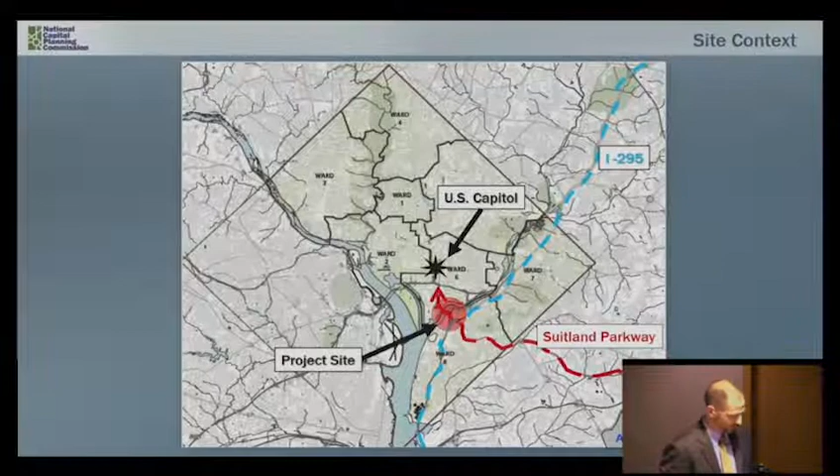As I mentioned, the project does include two major components, the Frederick Douglass Bridge, shown here, as well as the improvements to the South Capitol Street corridor. The bridge, just as a reminder, includes a triple arched form, including 6 travel lanes, dedicated bike paths, as well as pedestrian paths, and 4 overlooks.

The bridge has been subject to numerous consultations with many agencies, and we'll note that if any changes to the design are proposed, they will need to be submitted to the Commission again for review.

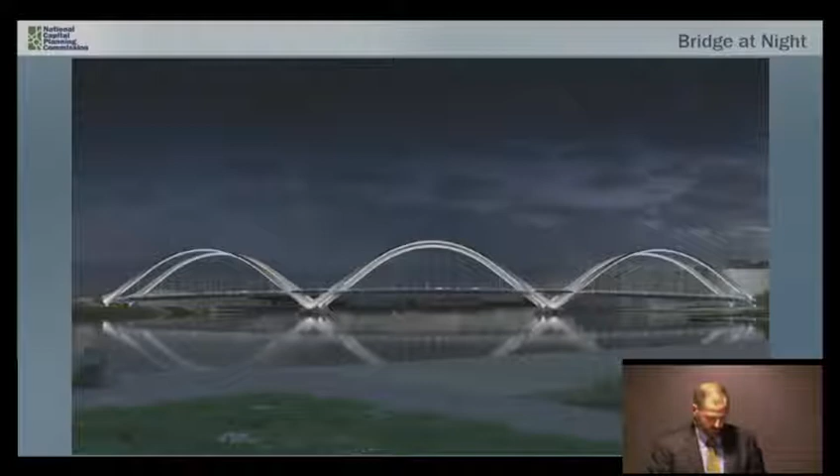We also noted in April that the project does include architectural lighting, but the specifics have not yet been determined. The bridge is south of the Capitol, as I mentioned, and there may be impacts to nighttime views depending on the type and intensity of the lighting. The current submission does not include additional details regarding lighting, though DDOT has acknowledged the importance of this issue both in this instance as well as other bridges across the district.

NCPC staff have been working to develop a study of bridge lighting for both rivers, thinking about a variety of issues, including city identity, the monumental core, natural systems, and historic resources. This analysis will be provided to DDOT to help inform some of the lighting discussions.

In this particular case, for the Frederick Douglass Bridge, staff believes that white lighting is appropriate for illuminating the bridge at night, but again, the intensity and brightness should respect the lighting hierarchy of the U.S. Capitol and other important monuments and memorials.

Further, the issue of temporary colored lighting is one that will need input from other federal agencies, including the Commission of Fine Arts and the National Park Service, because of their oversight in certain areas of Washington, D.C. and the Anacostia River, and additional coordination with other district agencies. Staff therefore requests that if temporary colored lighting is considered in this case, DDOT continue to work with NCPC and other relevant parties.

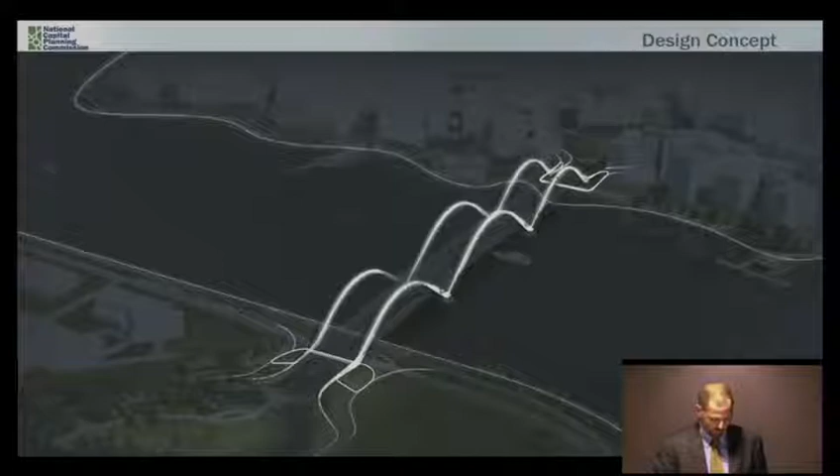So for the remainder of the presentation, I'm going to focus on the site improvements and particularly how the design has changed since your last review. I'll focus on your previous comments as well as some other aspects of the design that may need consideration.

The Commission in April did require DDOT to provide additional information regarding pedestrian and bicycle access. In particular, there were questions about the width and operation of the proposed pedestrian and bicycle paths. Here you can see an overall framework of the connectivity to and through the site.

For comparison, the proposed trails on the Frederick Douglass Bridge will be 18 feet. This will include two 5-foot bicycle lanes and one 8-foot pedestrian zone, and again, this is on both sides of the bridge.

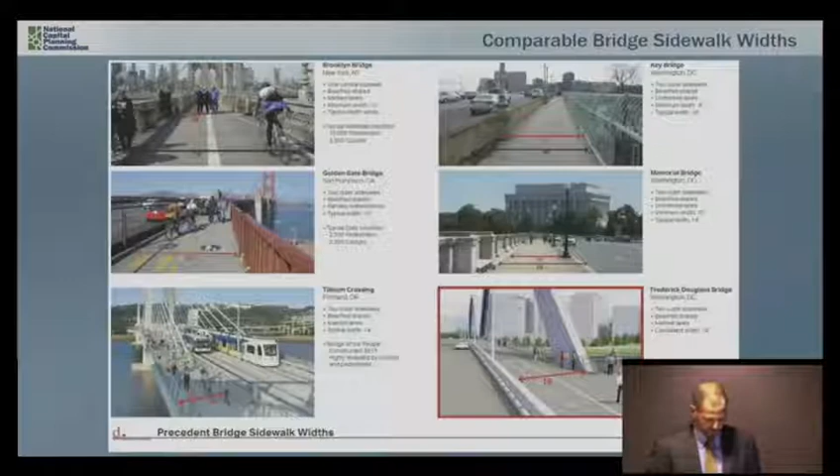In all these examples, pedestrians and bicyclists did share the same path. However, in most cases, the path is marked on the ground to denote these two pedestrian and bicycle zones. Staff did inquire whether some barrier could be used to provide separation between pedestrians and bicyclists. However, this separation would require at least a foot for the structure and then at least one foot on either side to avoid conflicts between bicycles and pedestrians.

DDOT has indicated that after the bridge is completed, there is an opportunity to look at how they function and whether operational changes are necessary. This may include making the bicycle trails one-directional on either side of the bridge. As such, staff suggests that DDOT evaluate whether changes to pedestrian and bicycle operations are necessary after the bridge has been completed and in use.

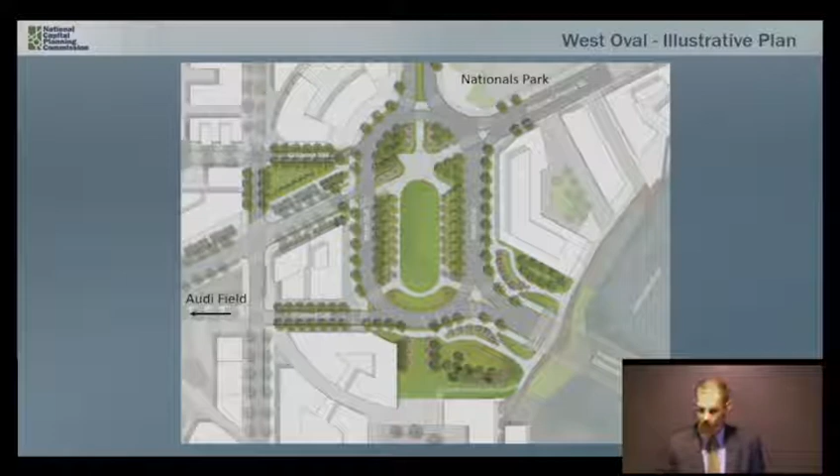Next, I'm going to talk about the West Oval, shown here on the screen. Today, this is a growing entertainment area. It's also a neighborhood anchored by Nationals Park, as well as the new DC United Stadium, or Audi Field, which is in nearby Buzzard Point.

Given the surrounding context, the West Oval is proposed to have active programming in a variety of ways, and this proposal is consistent with the concept review you saw in April. The design continues to emphasize that axial relationship with the U.S. Capitol, which is to the north.

In addition to that important north view, the northeast to southwest axis of Potomac Avenue is also an important alignment found within the L'Enfant plan, and you can see that here on the screen, cutting diagonally across the site. Because this corridor connects the two stadiums, it will likely serve as an important pedestrian connection.

In April, staff did note that this axis through the oval was not fully successful because it did not align with the cartway on either side of the oval. It also did not resolve pedestrian flows. As such, the Commission requested the applicant explore alternative design concepts to address this alignment, as well as the views of Potomac Avenue, where it crosses the oval to the north.

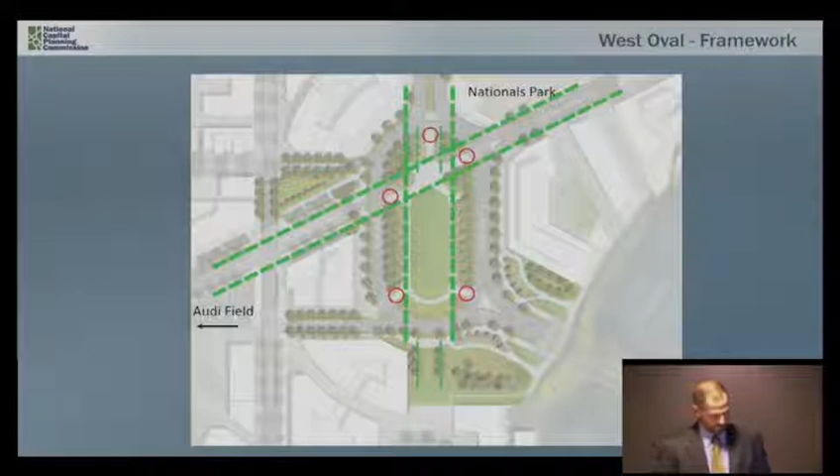In response to the Commission's comments, the applicant has revised the design to better resolve this crossing and the intersection with the West Oval. For example, the view shed has been defined through the introduction of new trees to help frame that view, and a star-shaped plaza has been created that reconciles the pedestrian flows from various points.

The resulting design creates a space that can be programmed for a variety of events while still accommodating pedestrian movement, and it also preserves that view to the U.S. Capitol.

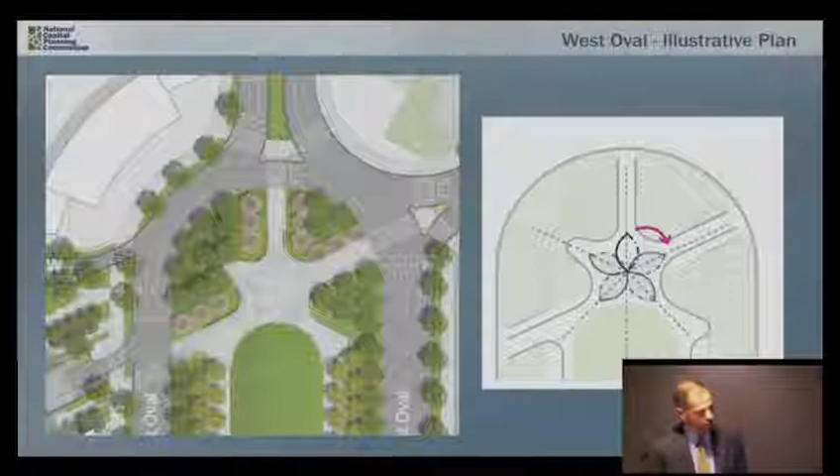Here's an enlarged view of that area, including the proposed plaza, and also how it would connect to the surrounding sidewalks and paths. And on the right, you can see a diagram that shows how the plaza form was generated.

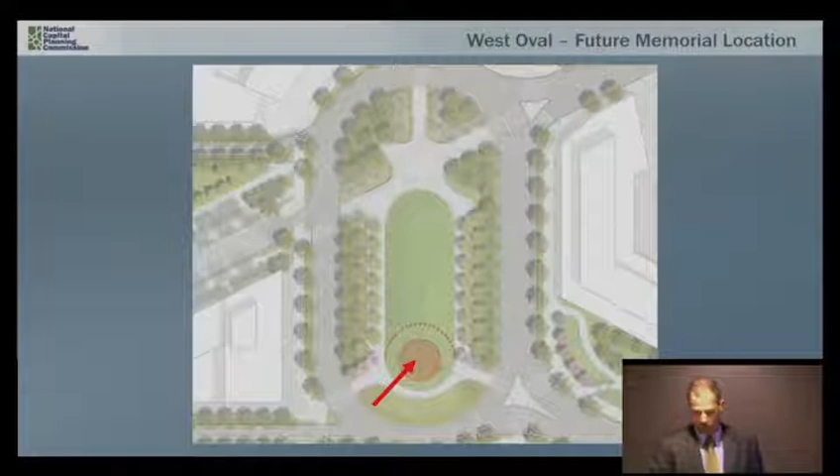This location takes advantage of the axial view of the U.S. Capitol, as well as the alignment of the new bridge, which enters there from the southeast. The topography in this location is also raised slightly to provide a focal point. In general, staff finds this proposed location appropriate, and I'll mention that the design at the bottom of the oval was actually modified to accommodate this.

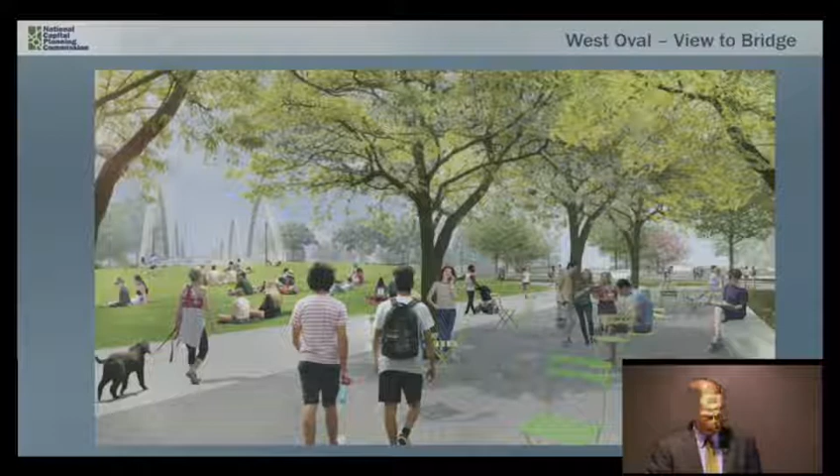As such, staff recommends the applicant consider adding additional trees and plantings at the southern end of the oval to terminate South Capitol Street, better frame the public space, improve the setting for any future memorial or public art, and also help reinforce this visual connection between the bridge and the west oval.

So next I'm going to talk about the east oval. This area is designed as a more passive space with pathways, natural plantings, and the esplanade that will help connect this area to the riverfront and Poplar Point further north.

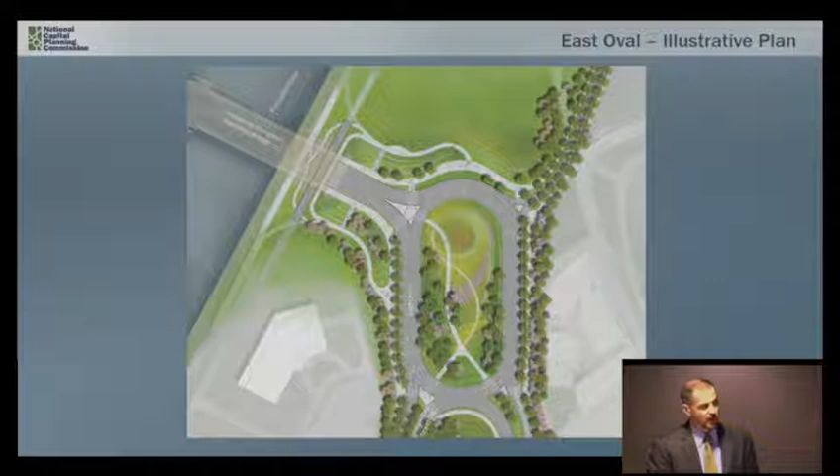The East Oval is generally surrounded by open space, including the Anacostia Riverfront and low-density development as it borders Poplar Point, again Anacostia Park, which is owned by the National Park Service, and Joint Base Anacostia Bolling, which is to the southwest. Portions of Poplar Point and nearby Howard Road could redevelop in the future, although the setting will likely remain more open as compared to the higher density development occurring on the West Oval.

In addition, I'll note the East Oval is only one small component of the larger improvements proposed in this area. As you can see here, the landscaping and reconfiguration of Suitland Parkway, which extends south from the oval towards historic Anacostia, is significant, and the project scope is much larger here than on the west side.

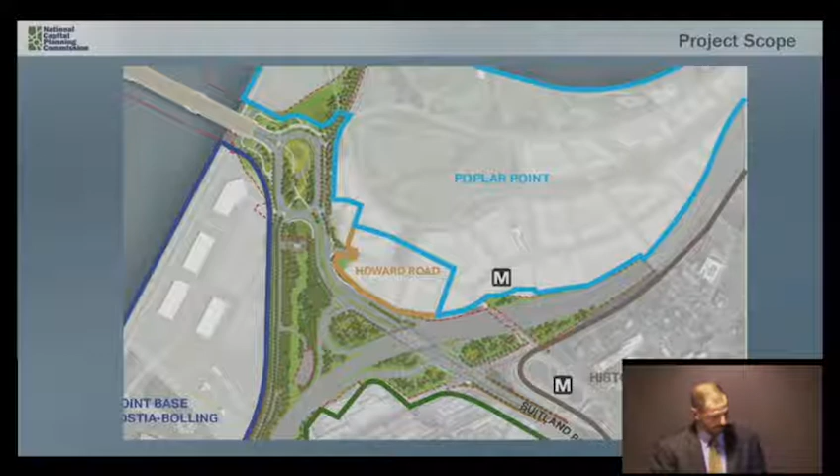Because of the setting, the East Oval could provide an opportunity to develop a larger scale local memorial or public art. In this location, it would not compete directly with the views of the U.S. Capitol, and it could also provide a gateway to Anacostia.

Therefore, staff suggests the Commission find that the East Oval is an opportunity for a gateway element, a future memorial or public art, and further, this oval has the most potential for a large-scale element to distinguish it from other nearby open spaces. In addition, this site could also provide interpretive opportunities related to Anacostia River, Poplar Point, and the historic Anacostia neighborhood.

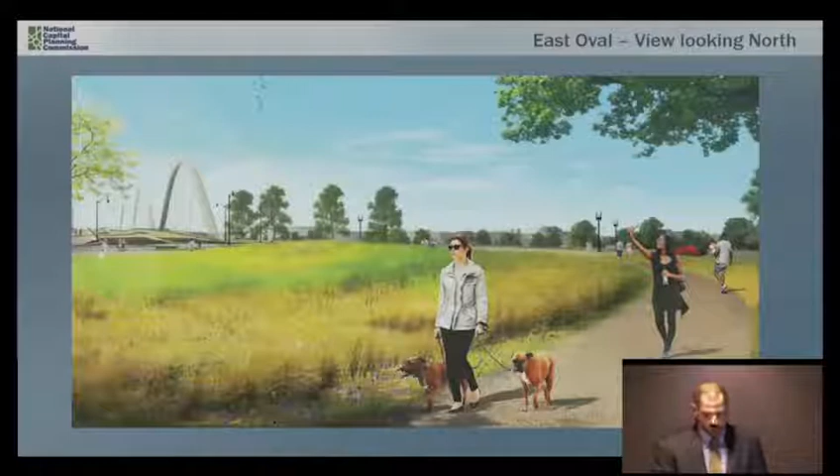Staff also recommends the applicant consider other opportunities for interpretation and programming which could serve as an amenity to the surrounding community.

Staff believes the visitor experience could be enhanced by increasing the number of trees and other landscaping. Such plantings could reduce the visibility of traffic and dampen noise from cars, while staying consistent with the natural landscape proposed. Landscape elements would need to avoid utility areas. Changes in topography could also be incorporated with similar effects. Staff suggests incorporating additional trees and plantings where possible to buffer pedestrians from noise and traffic views, particularly at the south end of the oval.

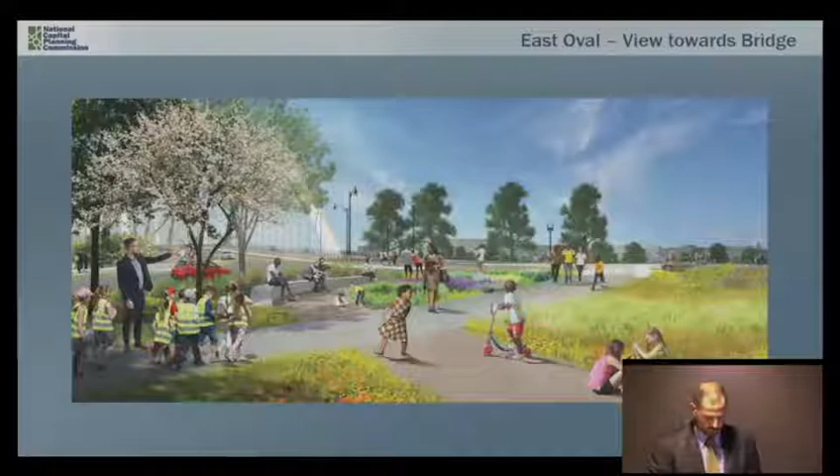At concept review, the Commission also requested additional information regarding stormwater management. The applicant has provided that information, and they will comply with the District Department of Energy and Environment regulations. Runoff will be captured and filtered in several locations throughout the project. We have bioswales and other measures situated in certain locations which will accommodate that runoff.

Finally, other information regarding signage, lighting, and other elements have yet to be fully developed. As such, staff recommends the Commission request that DDOT provide the following information for future review. This would include a lighting plan for the ovals and the esplanades, as well as the bridge, a signage plan that describes how that will be accommodated, and also details regarding the cultural legacy of Frederick Douglass and how they might be incorporated into the project, consistent with the visual design goals described in the final EIS.

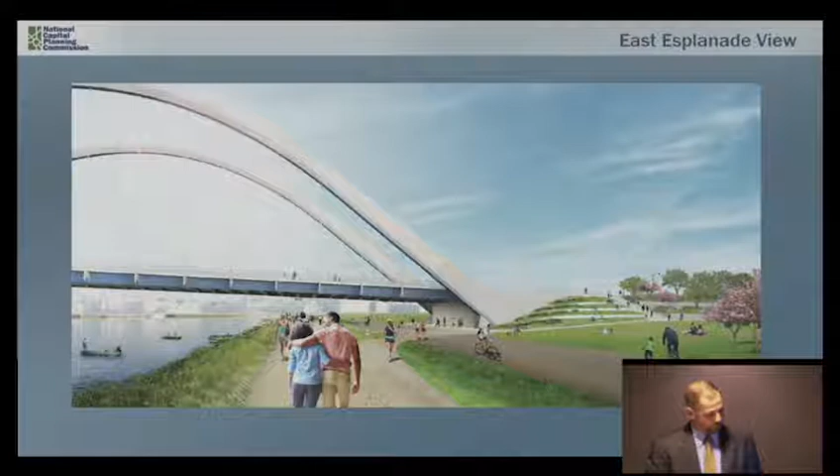It is therefore the Executive Director's recommendation that the Commission approve the preliminary plans for the South Capitol Street corridor landscape and site improvement, notes that staff is developing an analysis of bridge lighting, and in this case finds that white lighting is appropriate, but the intensity and brightness should respect the lighting hierarchy of the U.S. Capitol and other monuments. Requests that if temporary colored lighting is considered, DDOT work with the appropriate stakeholders on an operational agreement, and also recommends DDOT evaluate pedestrian and bicycle operations after the bridge has been completed.

Regarding the East Oval, notes that the siting here is different compared to the West Oval, and finds that the site could be an opportunity for a large-scale memorial or art element, and also additional interpretive and programming opportunities related to the river, Poplar Point, and historic Anacostia.

Staff also recommends additional trees and plantings to help buffer traffic views and noise, and requests DDOT consider other pedestrian connections at the northeast side of this oval to improve connectivity. Finally, requests DDOT provide information regarding lighting, signage, and also details regarding the cultural legacy of Frederick Douglass and how they might be incorporated into the project.

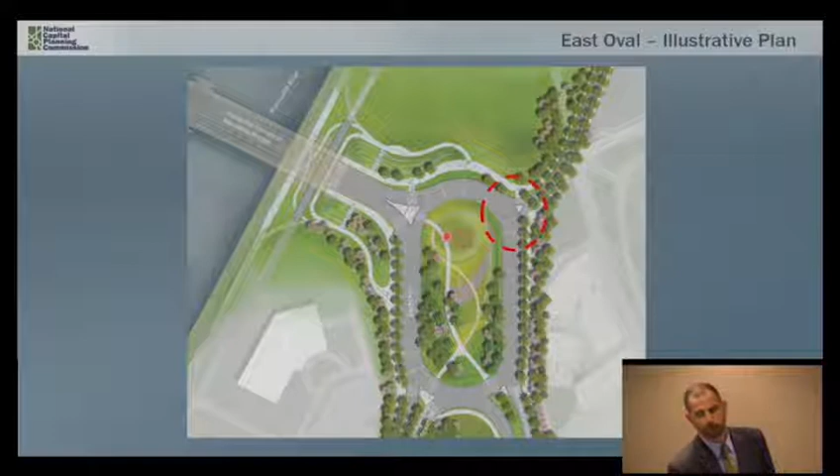And you're going to have gatherings in this space, and that looks like a pretty small island to me. I imagine that'll get worked out as you have events to do traffic control, but I'd like to hear more as this is developed about what kind of traffic counts they're expecting with pedestrians and bikes. If I missed that in here, I apologize.

But I'm not sure if we addressed that question specifically, but it's clearly a good question. One of the major changes here is the design speed of the oval is 20 miles per hour, and the speed limit posting is 15 miles per hour. So this is a completely different experience for drivers and pedestrians compared to how it is today after you go over the bridge, with the choice between South Capitol Street or Suitland, where there's an opportunity to pick up speed as long as traffic isn't backed up at rush hour. But this will be a completely different experience after the project's complete, with 15 miles per hour. I think of it more like a Lincoln Park, minus probably the speed humps.

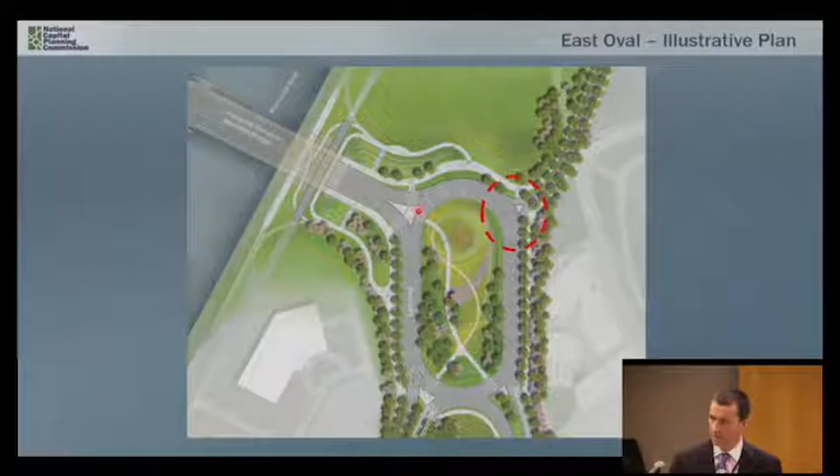Also, each crosswalk is signalized, so there'll be an opportunity to push to get a pedestrian-controlled right-of-way at lower speeds. I think also a lot of the emphasis, as we discussed earlier on the east side, is not just about the oval, it's also the riverfront access. Did I answer your question?

You answered it, I'll be curious to see how this works. Okay, and I think taking a harder look at perhaps some traffic calming besides the speed—I wouldn't, because the tendency will be that people will want to go faster. And I wouldn't rule that out for the future.

A lot of times, and I appreciate the comments about the bicycle and pedestrian multi-use path on the bridge, we'll see how that will work. But we're proceeding informed by best practices and design guidelines. It's no secret we have many intersections, much less complicated than this, that aren't performing and need further traffic calming.

But I think, as we see, it would probably be, on days when this is programmed, as I think we would all aspire it to—thinking about a World Cup celebration or a festival in the summer—there's probably temporary parking around it, and it's very busy. It's looking more like a Lincoln Park kind of space, with a wedding in the middle of the oval. So there'll be different personalities at different times of day. Yeah, okay, thank you. Yes.

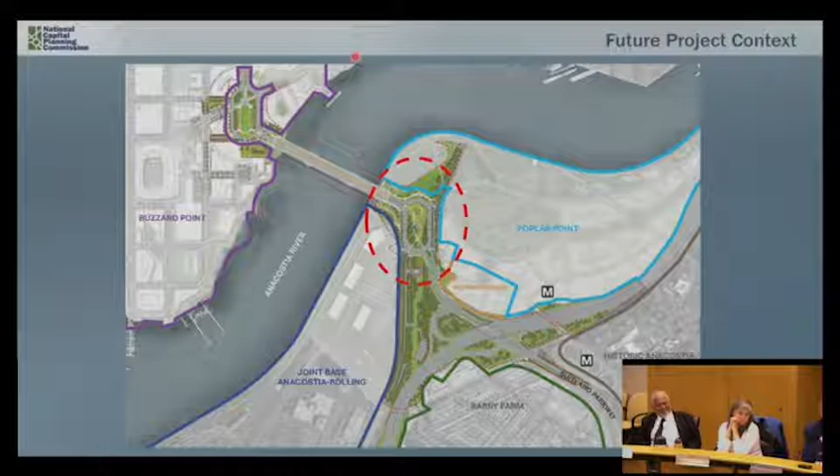Yes, Commissioner Shaw. Well, I thank you for your comments, Ms. Wright. And I think we've talked about this before about the context of place, right?

We just put the green over the ovals and don't look at the fact - I was at Buzzard Point for the ribbon cutting, and it's amazing how it's changed, with the really intense streetscape plan and open space plan for Buzzard, the openings for Nationals Park. So sort of seeing this within the context of these two green things doesn't give the appropriate context of how it's fitting into a larger planning system. And that's on both sides as well.

We've had a strong intention for the green space - I remember we were doing Shepherd Parkway and fighting over the brick sizes and all that. It's meant to look and feel a different way, like the little lanterns, and we've planned it that way, right? So I think both of these are responding to the respective places in which we've put those two sides. I like that it has the two personalities there, but once again, this may be just about how we show the larger context of what's going on here in the future.

And then for DDOT, once again we've been a very happy partner with you as Office of Planning on all the things that have come here in terms of design. So I think for any of the comments that come to DDOT, I'm taking those also as the Office of Planning for making sure that we can, either in our engagement, programming, and other things, get the appropriate larger planning context for this.

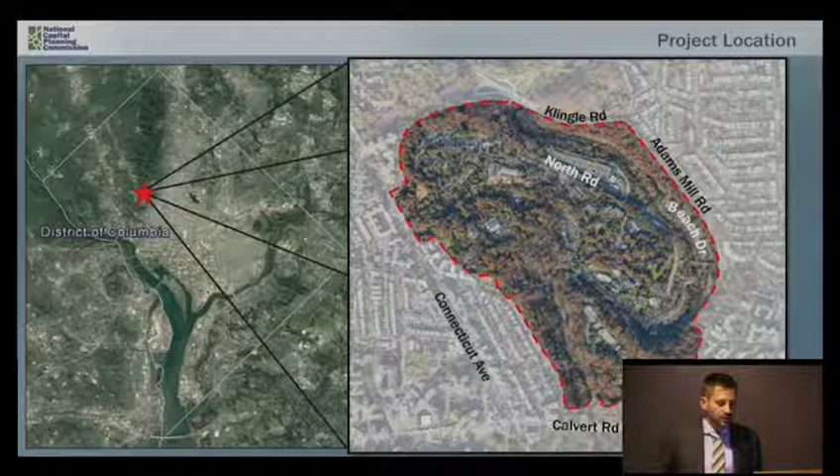Good afternoon, Mr. Chairman and members of the Commission. The Smithsonian Institution has submitted site development plans for supplemental perimeter fencing at the National Zoological Park in Washington, D.C. The project was reviewed as a concept design last month and is now before the Commission for preliminary and final approval. The National Zoo is located off Connecticut Avenue in northwest Washington, D.C., in a largely residential area of the city. It's generally bounded by Klingle Road to the north, Adams Mill Road to the east, and Calvert Road to the south. The zoo also sits within Rock Creek Park, which is managed as a unit of the National Park Service.

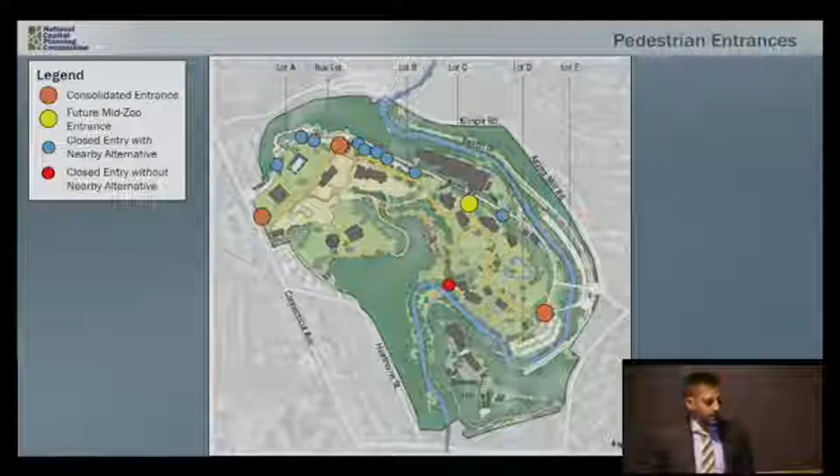The large majority of pedestrian entry points are a short walk from the consolidated entrances, which is where most pedestrian traffic currently enters the zoo.

This map shows where existing entry points would be closed, as well as their closest entrances. The blue circles are entry points with nearby access to the consolidated entrances, and the red circle would have no alternative access nearby. The only area where pedestrian access would be closed without a nearby alternative is the location near Research Hill in Amazonia, which is in an area of the zoo property largely identified for staff use only.

The Smithsonian has indicated that several studies have identified open access to the zoo as a safety concern, and that there have been a series of high-profile security incidents and threats to the safety of visitors, staff, and animals.

To meet security needs, the zoo is proposing a visitor access and security fencing project, which it is planning to implement in multiple phases. The first phase, which is the subject of this review, will secure the perimeter through the installation of fencing and serve to formalize the 3 visitor access points. It's important to note that public access through the entrances would still be open at the completion of this phase.

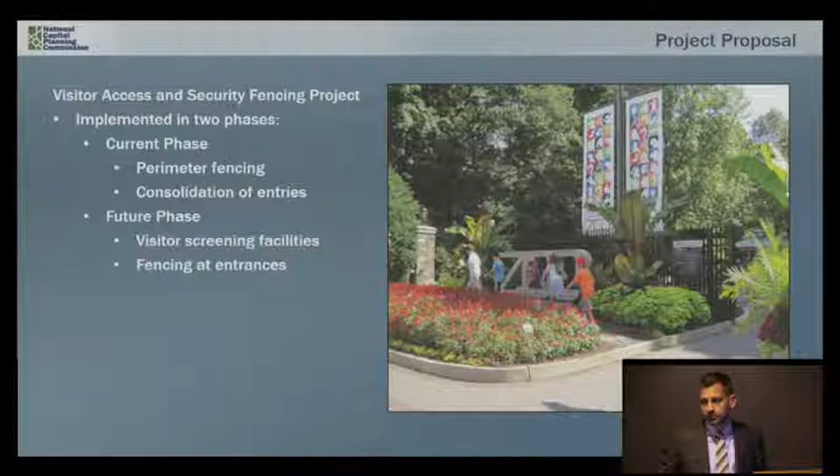Before I review the new fencing, I first want to review the layers of existing fencing that have been installed in various locations to meet several different objectives.

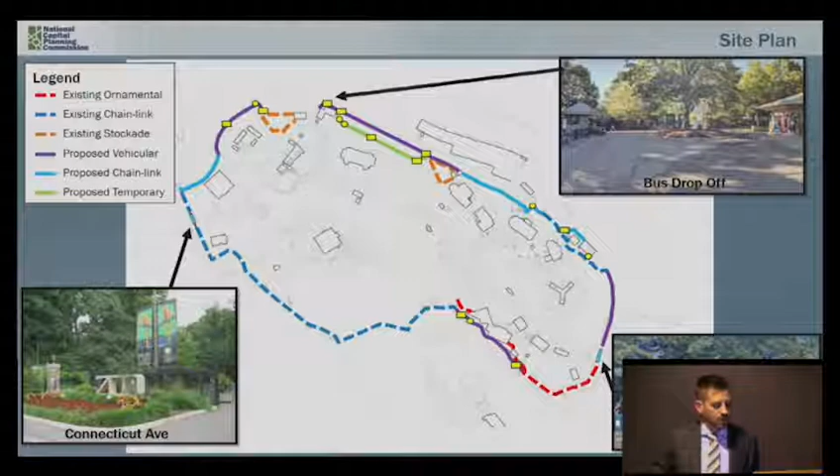As part of this project, the applicant has indicated that it plans to install several pedestrian and vehicular gates in the new fencing that would allow for operational and maintenance access at key locations along the perimeter. They're marked here in yellow. The circles represent pedestrian entries and the squares are vehicular entries.

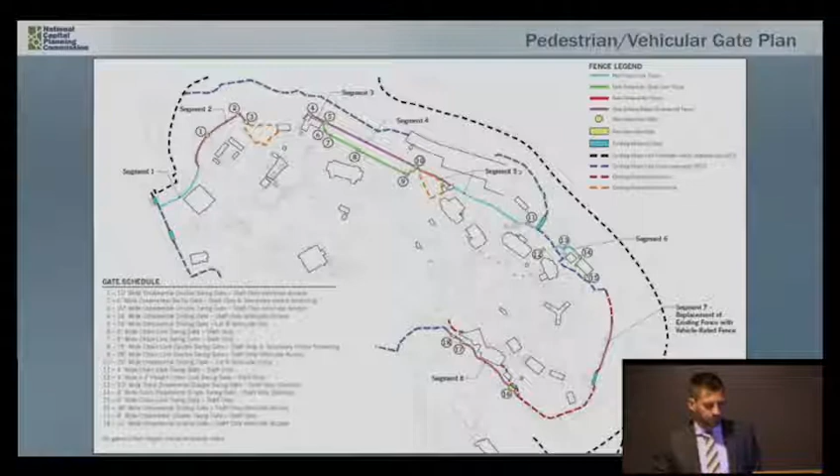I'll next review all of the areas of proposed fencing by segment, along with submitted renderings that demonstrate visibility of the fence from key viewpoints, which are marked on each map as a gray circle.

In the previous submission, ornamental fencing was planned for this location, but in its review of the project, the Commission of Fine Arts expressed concerns over the visibility of ornamental fencing. CFA recommended chain link fencing in this location, noting it would be less visible in areas of dense vegetation. Staff has analyzed this change, concurs that chain link fencing would be less visually prominent here, and further notes that it's consistent with adjacent segments of existing chain link fencing.

Continuing around the zoo, the second segment would run from the visitor center to the bus drop-off. This segment would use a new fence type, an 8-foot tall vehicular rated ornamental fence, which would be used in visible locations along the roadway to prevent ramming. It would be similar in style to the existing ornamental fencing used at the zoo, with the exception of larger post sizes and horizontal reinforcing channels and cables to meet crash rating standards.

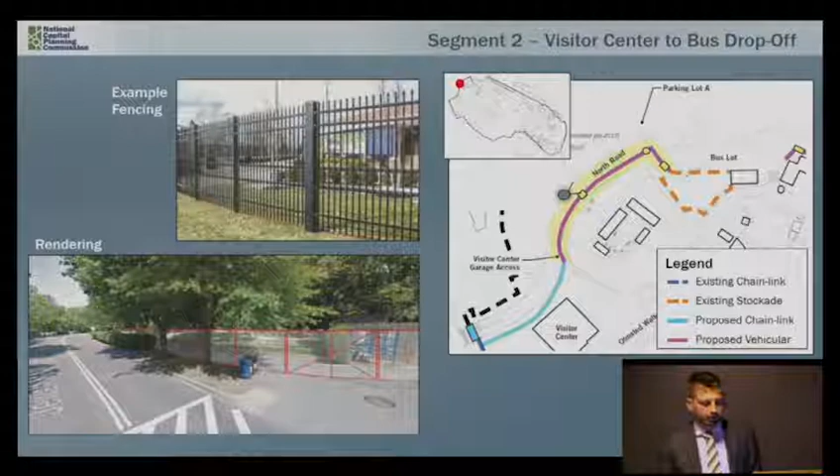It would connect to the east to a tall wooden stockade fence, shown with a dashed orange line, which is used to shield a maintenance area from public view. As can be seen in the rendering, this segment of fencing would separate an internal walking path from North Road and the outer zoo perimeter.

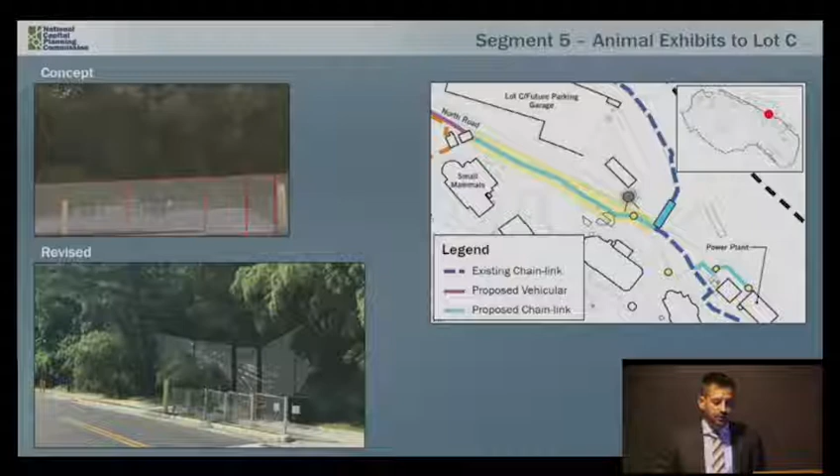Near the zoo's power plant, a modified chain link fence would be built upon existing flood control walls. The fencing in this location would serve to secure and isolate the power plant from the main zoo. The initial proposal at this location was the use of modified ornamental fencing, but again, in response to comments from CFA, the applicant has revised the submission. Staff has analyzed this change and supports the use of chain link fencing.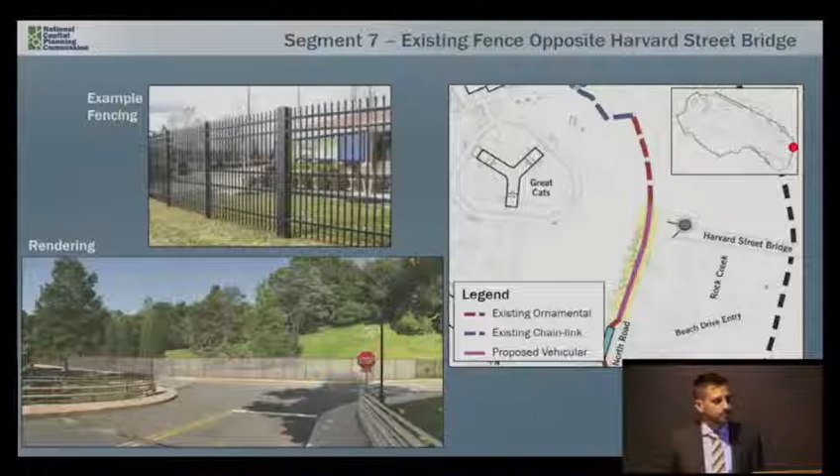Continuing past the existing fencing at the lower zoo entrance to the other side of the zoo, vehicular-rated fencing would be used to secure the pedestrian walkway along the zoo's Amazonia exhibit. Please note that while the rendering shows existing security gates at this location, the project would include the removal and replacement of these gates for consistency in style and to avoid redundant security measures.

This segment of fencing would connect to existing ornamental fencing to the east and existing chain link fencing in the vegetation over to the west.

In conclusion, it's the Executive Director's recommendation that the Commission approves preliminary and final site development plans for supplemental perimeter fencing at the National Zoo. The purpose of the project is to replace some areas of existing fencing, add segments of fencing to eliminate gaps, and consolidate pedestrian access points.

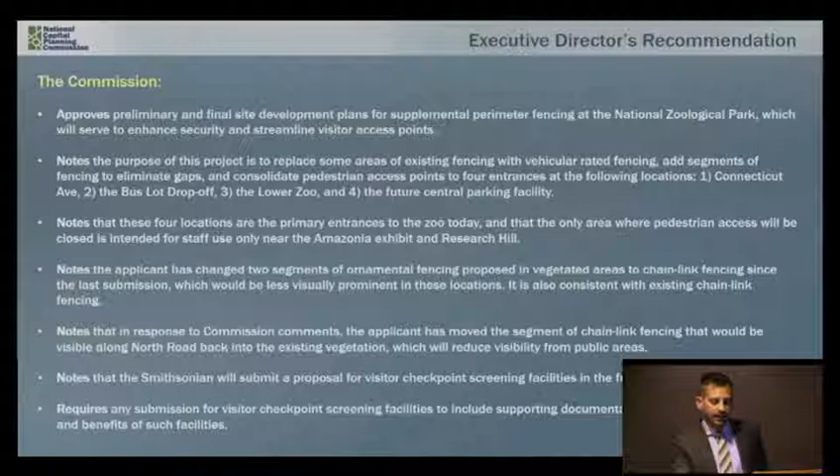These future consolidated entrances are the primary entrances to the zoo today, and the only area where pedestrian access will be closed is intended for staff use only near the Amazonia exhibit and Research Hill.

The applicant has changed two segments of ornamental fencing proposed in vegetated areas to chain link fencing, which would be less visually prominent in these locations. The applicant has also moved the segment of chain link fencing along North Road back into the existing vegetation, which will reduce visibility. The Smithsonian will submit a proposal for visitor screening facilities in the future, and any such submission must include supporting documentation explaining the need for and benefits of such facilities.

Before I conclude the presentation, I'd like to note that staff has received many public comments in opposition to this project, which are attached to the EDRs in front of you. As noted earlier, most of the concerns were related to the construction of visitor screening facilities at the consolidated entrances, which will be considered under Phase 2 of the project. We anticipate that these outstanding concerns can be addressed during this future review process.

That concludes my presentation. I'm available to answer questions, as are our representatives from the Smithsonian, the zoo, and the consultant team. Thank you, Mr. Gerbich.

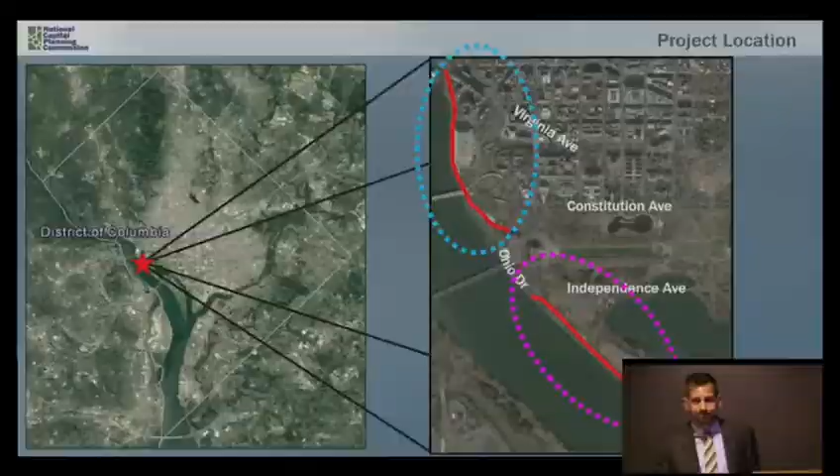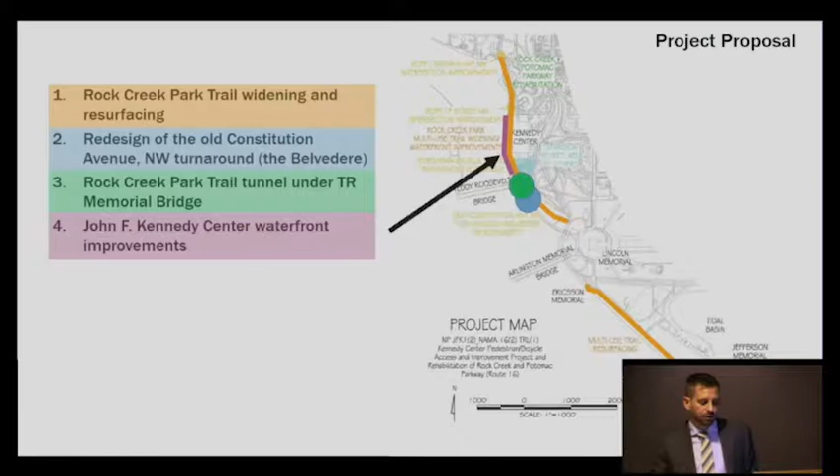The construction of a tunnel for the Rock Creek Park Trail under the Theodore Roosevelt Memorial Bridge, marked with a green circle, and trail improvements along the Potomac waterfront near the John F. Kennedy Center, marked in purple. I'll next describe each of these components in more detail, including staff analysis and key recommendations.

The first major component is widening many trail areas and resurfacing the highlighted segments. Trail widths currently range from 8 to 10 feet, many out of compliance with established standards recommending a minimum width of 10 feet. The northern segment from Virginia Avenue to Ohio Drive will generally be widened to 14 feet, with 10 feet in areas constrained by important trees or landscape features. The southern segment will remain at 9 feet. The entire highlighted trail will be resurfaced with consistent porous asphalt pavement.

Staff believes that the use of porous asphalt along the length of the trail will provide a much smoother, more consistent experience for cyclists, and that the additional width in many areas will allow for improved navigation and reduce the risk of cyclist-pedestrian conflict. Further, the use of porous pavement will help meet stormwater regulations and serve to reduce runoff into the adjacent Potomac River.

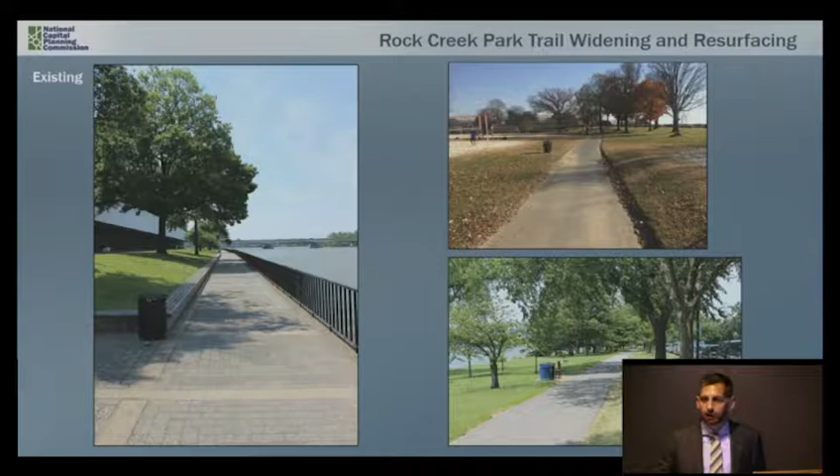The second major component includes the redesign of the Belvedere. The Belvedere was the original turnaround for Constitution Avenue at its western terminus, but since the construction of Rock Creek and Potomac Parkway, it has not served a traffic function. Because of its prominent location at the end of the National Mall, adjacent to the Potomac River, the site was identified as a prime candidate site for a future memorial in the NCPC Memorials and Museums Master Plan, and as you recall, was recently considered as a potential location for the National Desert Storm and Desert Shield Memorial.

The site, however, is primarily auto-oriented with a paved drive aisle that allows for vehicular access. The applicant is proposing a redesign that will accommodate enhanced landscaping, realign the trail, and provide a site layout in preparation for a future memorial.

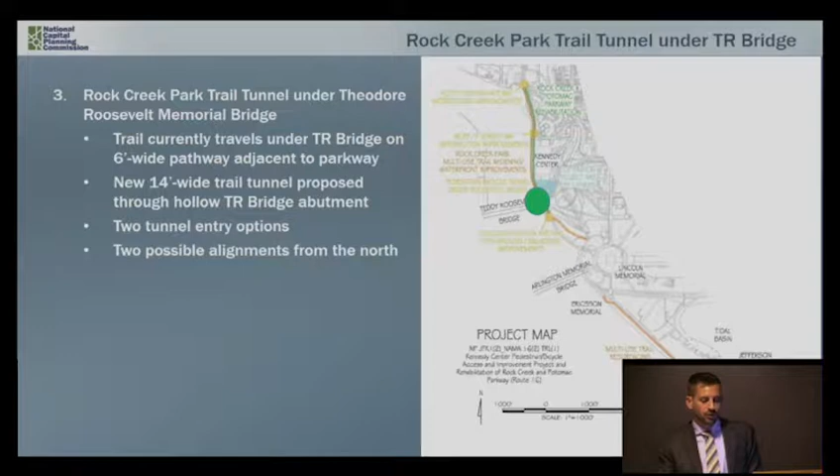This slide shows the existing 6-foot wide trail route that is shared with vehicular traffic on Rock Creek and Potomac Parkway. Note that in addition to the narrow width, there are no hand railings or other interventions here to improve safety.

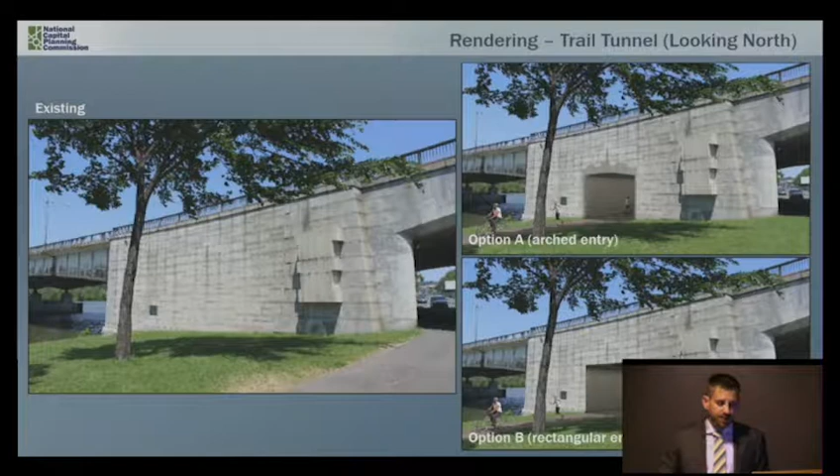In general, staff supports efforts to create a dedicated tunnel in this location, which would allow for a wider trail and greatly improve safety for trail users. Further, staff finds that the arch option is more architecturally interesting and would be consistent with the arched entry of the existing vehicular tunnel and the arch spans that cross the Potomac River.

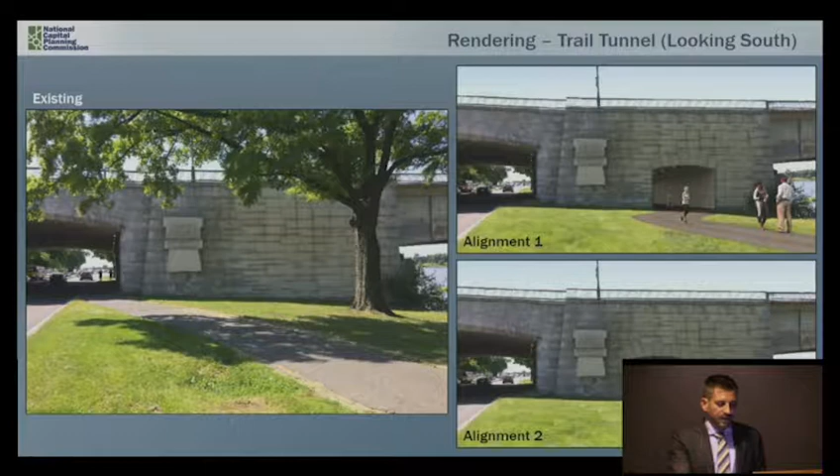While the abutment is hollow, the applicant has noted that the centered tunnel in alignment 1 would impact a counterfort and would require structural reinforcement of the bridge. Alignment 2 would avoid this counterfort and require fewer engineering interventions. Further, the plans indicate that the trail in alignment 1 would need to be curved to achieve the appropriate angle moving into the tunnel, as can be seen here.

Staff believes that this would reduce visibility to and through the tunnel and could pose a safety concern, while alignment 2 would be more direct and allow for greater visibility. In summary, for this component of the project, staff supports the slightly off-center alignment 2 with the arched tunnel entryway because it would avoid impacts to major structural elements of the bridge and allow for clear lines of sight through the tunnel for pedestrians and bicycles, while the arched entry would complement the existing bridge design.

The last major improvement is on the segment of trail next to the John F. Kennedy Center waterfront, shown here with a purple line, which includes the widening of the trail and removal and replacement of existing trees and benches. The trail is currently 10 feet wide, but seating areas and benches constrain the functional width to 6 feet. The trail would be resurfaced with porous asphalt pavement and widened to 14 feet, which would require the removal of several trees, many of which are in fair to poor health.

It's important to note, while discussing this segment of trail, that this is the location of the pedestrian bridge across the Parkway that was approved by the Commission as part of the Kennedy Center expansion project. The improvements here and at the Belvedere will not affect access to or from the Kennedy Center via the future bridge.

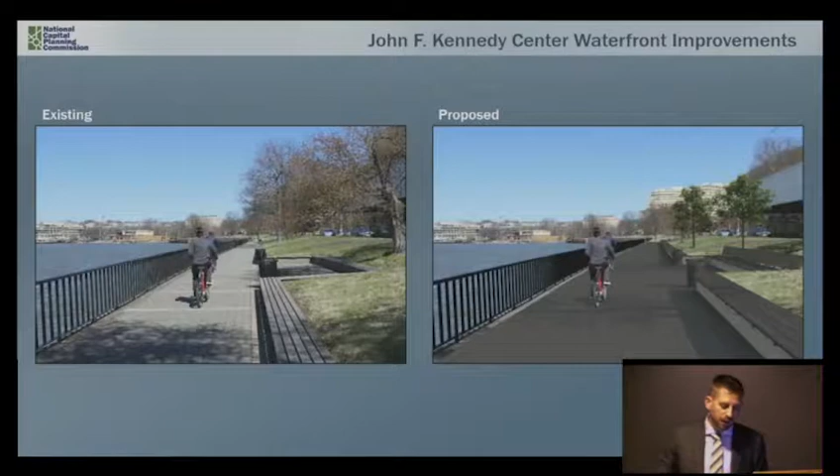While the submission notes that many trees would be replaced, staff would like more information to better understand the extent of mitigation and compliance with the tree replacement policies in the comprehensive plan. Accordingly, staff requests that the applicant provide a narrative that describes the tree replacement strategy for the project, as well as how it will prevent a net loss of tree canopy in accordance with the policies related to tree canopy and vegetation in the comprehensive plan.

In addition to the more significant project elements, there are a couple other minor improvements of interest to the Commission. The first is the removal of a segment of sidewalk along the north side of Virginia Avenue adjacent to the Parkway, which is shown in orange on the image on the right. There are no crosswalks on this side of the street that connect to any adjacent sidewalks or trail segments, nor does the sidewalk continue along the Parkway. The placement of the sidewalk is confusing for pedestrians, encourages inappropriate street crossings, and presents safety concerns. Staff believes that its removal will help improve navigation for pedestrians and cyclists at this intersection.

Lastly, the submission notes that signage will be provided throughout the project area, which will further improve wayfinding and navigation. Staff supports the need for additional signage, but to ensure sufficient information to analyze the scope and scale of its placement, staff requests additional information regarding the extent and location of any proposed wayfinding signage.

In conclusion, it's the Executive Director's recommendation that the Commission comments favorably on the proposal to improve Rock Creek Trail, finds that site improvements and landscaping proposed at the Belvedere will help formalize this location as the site for a potential future memorial, supports trail alignment 2 with the arched tunnel entryway because it would avoid impacts to major structural elements of the bridge, allow for clear lines of sight, and complement the existing bridge design, notes that several trees will need to be removed to widen and realign the trail segment near the Kennedy Center.

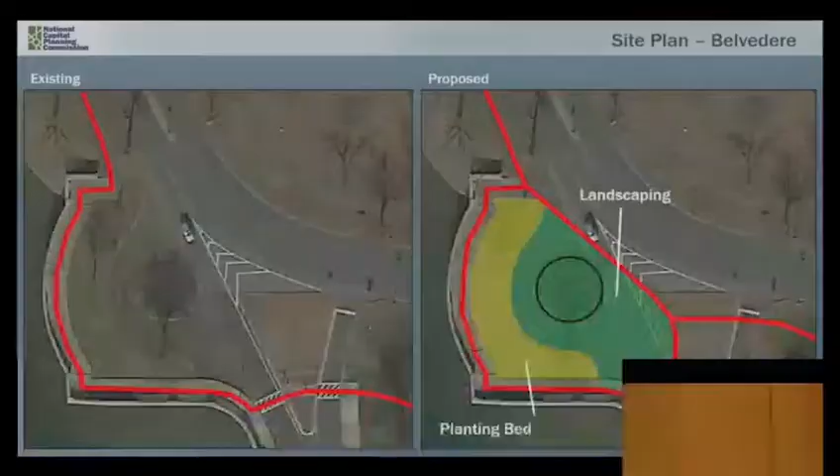Basically the area you can see, the kind of expanded green area over on the right side, that would move out to the right, and that side lane there would move back onto the main roadway, and the turn would occur kind of where that existing leg is over on the right side. So it'd be reorienting that so you have a more traditional intersection that occurs in that location.

Okay, and is that two-way traffic at this point, or one-way? Two-way. Right now you kind of have it coming in from one side and out the other. It's going to be going in and out in the same area in the proposal. It'll be two-way, but of course you can only go one way at certain hours of the day when the Parkway reverses. Understood. Some people actually follow that.

This is an important part of it. We're capturing a little bit more green space instead of asphalt, but it's very important to regularize that intersection a little bit, because right now people come off that Parkway and shoot right up to the Memorial Bridge, and it's just a speedway there, so this will slow things down.

One other quick question on the timing. Since this is a concept design at this stage, when do we think we'll be seeing preliminary? You have a sense of that? That is probably a question for Park Service. The compliance path is pretty easy. This is a categorical exclusion, and we have more compliance work to do, but I'd ask Tom Shiflett, Federal Highways, if you can tell us more about when we think we'll be submitting for preliminary.

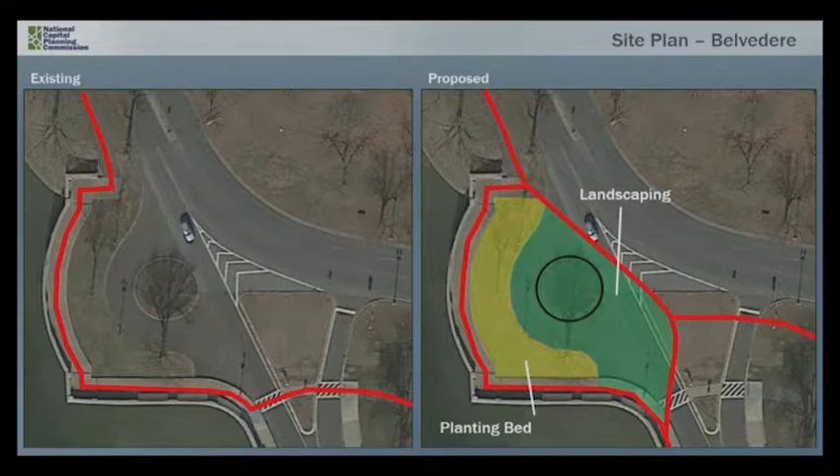I think it's within a few months. You need to come to the microphone, please, and announce your name and your role in the project.

My name is Tom Shiflett. I work for Federal Highway, Eastern Federal Lands. I'm the project manager for this project. The next submittal will be about the end of August, beginning of September, I don't remember the exact day. That will advance these concepts a little bit more, probably to the preliminary stage. Some of the other work, which is mostly rehabilitative in nature, will be actually to a 70% design. So you're talking about the design development phase. Yes, what that boils down to is that we'll be back in the September, October timeframe for preliminary and final, something like that. Yes. Okay, thanks.

Thank you. Any other comments or discussion? Hearing none, I'd entertain a motion to approve. All in favor, say aye. Aye. Opposed? Unanimously approved. Thank you. Fantastic, thank you.

Next is agenda item 5D, for approval of preliminary site and building plans for the new master clock facility and the rehabilitation of several historic buildings at the U.S. Naval Observatory, submitted by the Department of Navy. I'm looking at our clock on the wall, and I'm hoping that we're right on time with the master clock.

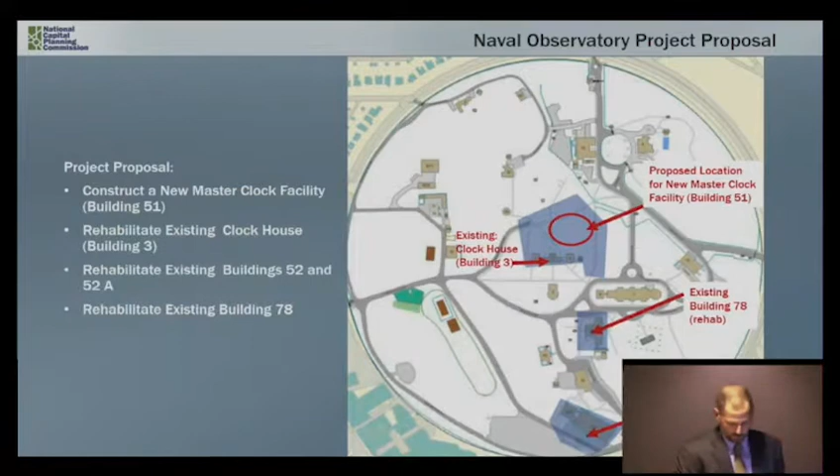The Naval Observatory performs an essential scientific role for the United States, including the Navy and the Department of Defense. Its mission includes determining the positions and motions of the Earth and other celestial objects, maintaining precise time, determining the Earth's orientation in space, and maintaining the master clock for the Department of Defense.

The campus has been determined eligible as a historic district for the National Register of Historic Places, including the buildings, structures, and landscape elements contributing to its significance. This period of significance begins in 1881 and ends in 1954. Architect Richard Morris Hunt designed many of the buildings and landscape features for the campus beginning in the 1880s, and these buildings are the only known examples of his work in Washington, D.C. These include the clock house, which I mentioned, as well as the administrative building.

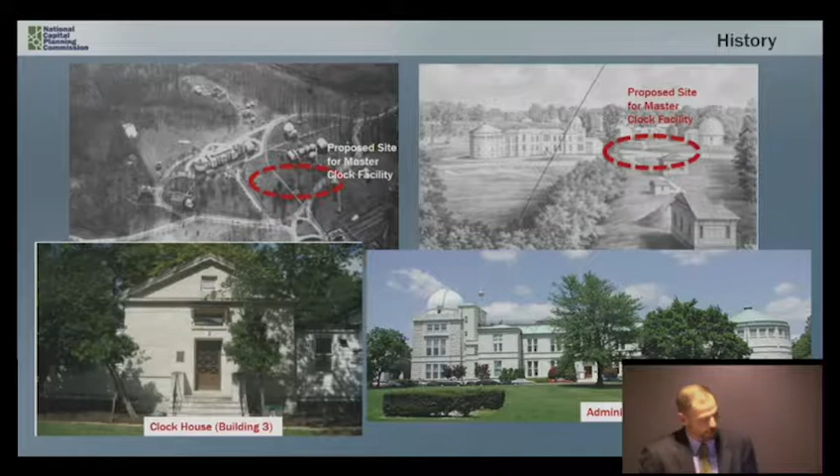As part of their process, the Navy compiled a historic landscape survey in 2017. This identified significant historic landscape elements, which informed the decision for locating this new master clock facility. This diagram shows some of the analysis they undertook as part of that.

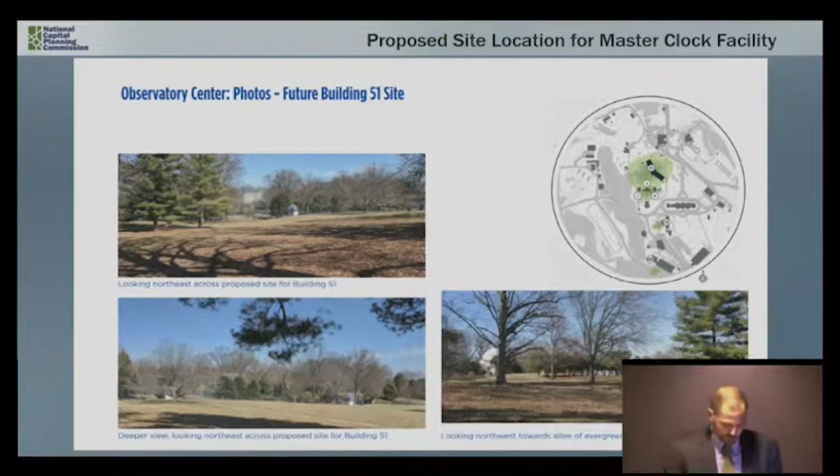Moving on, I'm going to talk now about the proposed siting of the facility, including its location and design. While consolidating many functions into one building, the design of the new master clock facility must address many requirements and constraints while meeting the mission needs and project needs, integrating into the existing site and landscape, and being compatible with the existing buildings and the spatial organization of the campus.

For mission reasons, the master clock facility needs to be located as close as possible to the clock house while addressing some of the constraints on the site, including security, avoiding geothermal fields, archaeological sites, and also avoiding sites that interfere with some of the existing telescope buildings. These are all constraints on where this building can be located.

Prior to the submission before you, the Navy looked at some other options and met with the agencies early in the design process to consider a different location, directly north of the historic clock house, shown here. This was problematic in several aspects because it would visually compete with the historic buildings, including the clock house, and the axial relationship established by the historic building would also impact the landscape elements.

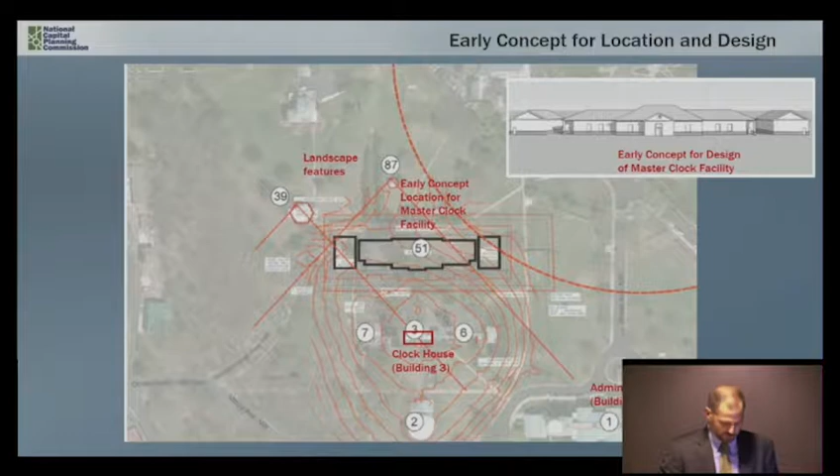This location was dismissed, and the Navy identified a new location, which is here before you today. With this particular scheme, the Navy and the agencies found that the concepts for the exterior design, shown in the top right, were problematic because they started to replicate the more traditional architecture and stylistic designs found on the campus. As you'll see, the Navy has submitted a different design approach in response to some of these comments.

Here's a blown-up plan of the proposed facility. This location is slightly northeast of the historic clock house because it best addresses the site constraints I mentioned. Vehicular access to the facility would be provided by extending an existing avenue around the site, and this extension will eliminate an existing dead end. Pedestrian access to the clock house will be from the existing network of sidewalks on the site, and there will also be a new sidewalk planned along this road with ADA access to the new building.

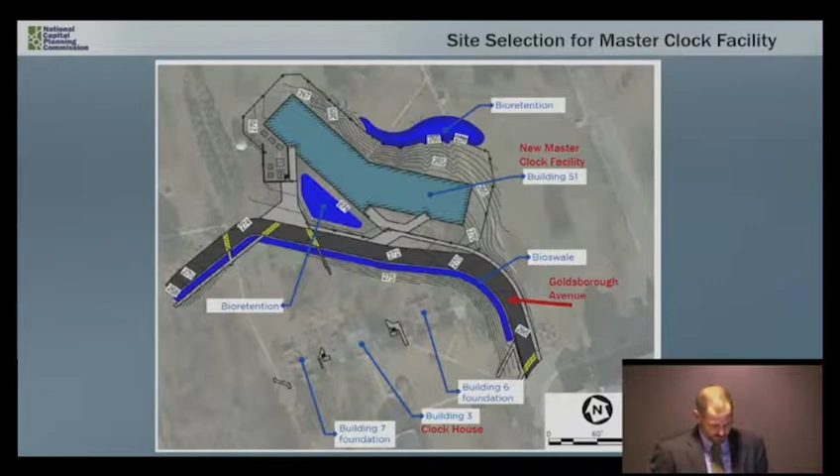The new facility will also comply with stormwater retention and erosion regulations. It will include rain gardens at the front and rear of the building, highlighted here in blue. Therefore, staff recommends the Commission support the Department of Navy's proposed location for the new master clock facility, as well as the site location, noting that it is lower in grade than the historic clock building.

So now looking at the proposed design for the master clock facility, there's a rendering here. The function of the facility requires the building to be linear in plan, 1 story in height, and approximately 15,000 square feet. It is served by redundant equipment rooms located at each end. And for security reasons, a single entrance is the primary ingress and egress with some additional emergency exits.

The building's operational program requires there be no windows, and therefore the only other openings are those related to mechanical systems. Following some of the latest agency discussions, the design has evolved to reflect a more minimalist contemporary design, which really quiets the building, allowing it to be in the background and also not to compete with some of the existing historic buildings. As you can see here, the design is rectangular in form with 2 wings that intersect near the main entrance.

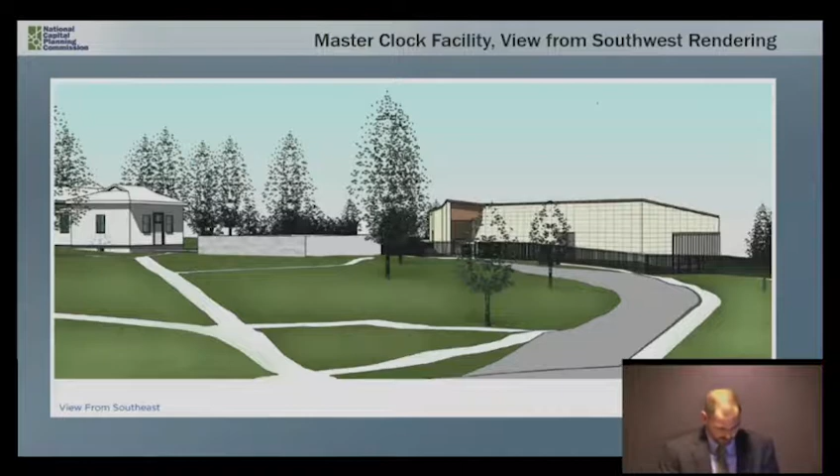The facade of the building facing the old clock house has 3 openings: the main entrance, as I mentioned, plus the emergency exits. The function of the master clock facility requires some special security features, including a perimeter fence. An additional sliding gate for egress and access will also be provided.

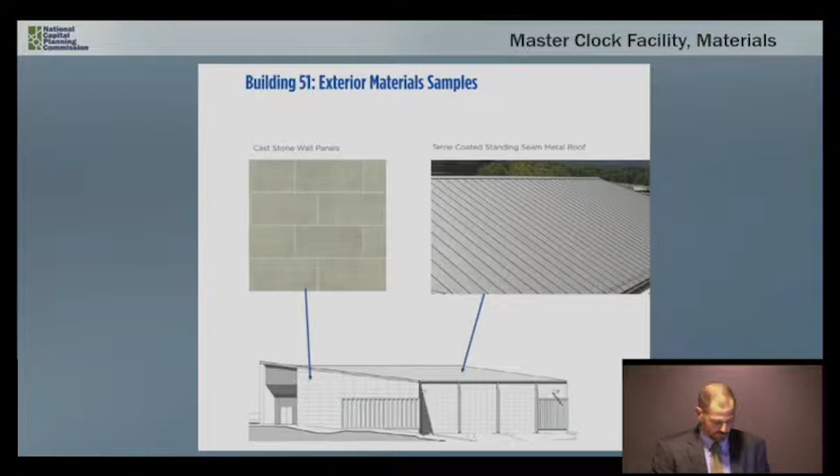The exterior finishes shown here are intended to complement the other buildings on the campus, especially the telescope structures. Therefore, staff recommends the Commission support the design of the master clock facility, as well as its minimalist contemporary architectural expression, finding that it does not compete with the architectural character of the historic buildings designed by the architect Hunt. It also relates in function to the master clocks for the Department of Navy.

And then finally, very quickly, I'm going to walk you through some of the proposals for rehabilitation of some of the other buildings. The first is Building 3, again the original clock house. This will continue to serve as an operations base and, as I mentioned, sleeping quarters. The foundations for the historic transit houses, which are Buildings 6 and 7 on either end of this building, will also be stabilized.

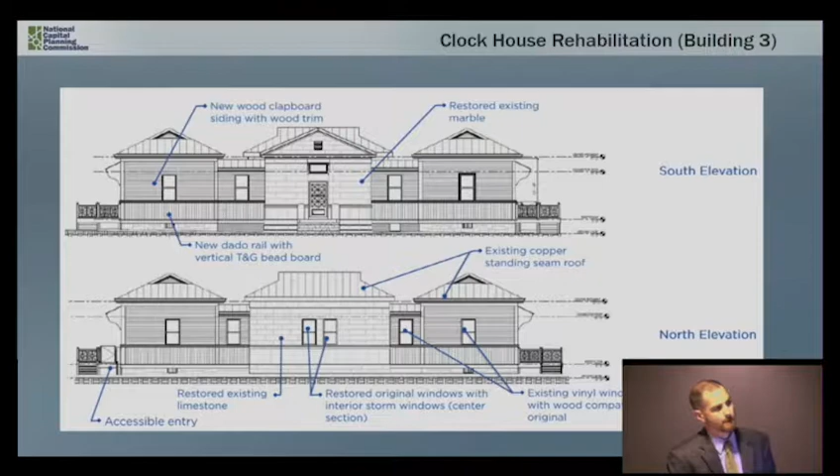Some of the improvements include removing the current vinyl siding and replacing it with wood siding and trim. The existing standing seam copper roof will also be retained, and other original historic elements, such as crown moldings, flooring, and chair rails, will also be restored. In addition, a new ADA access lift will be provided in a manner that's complementary to the existing building.

Buildings 52 and 52A will also be rehabilitated. Again, existing non-original windows and other materials will be replaced, as well as the addition of anti-terrorism protection requirements. And then stormwater management has also been incorporated into the project.

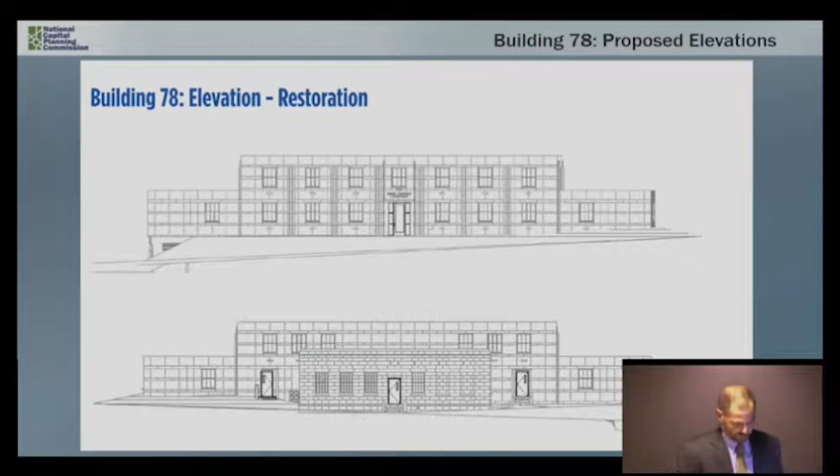So overall, the design of the new master clock facility balances a constrained site, as well as some specialized operational requirements and historic preservation considerations. The site location, design expression, massing, and palette of the proposed building are proposed to be compatible with the existing historic buildings while avoiding competing with some of those historic facilities.

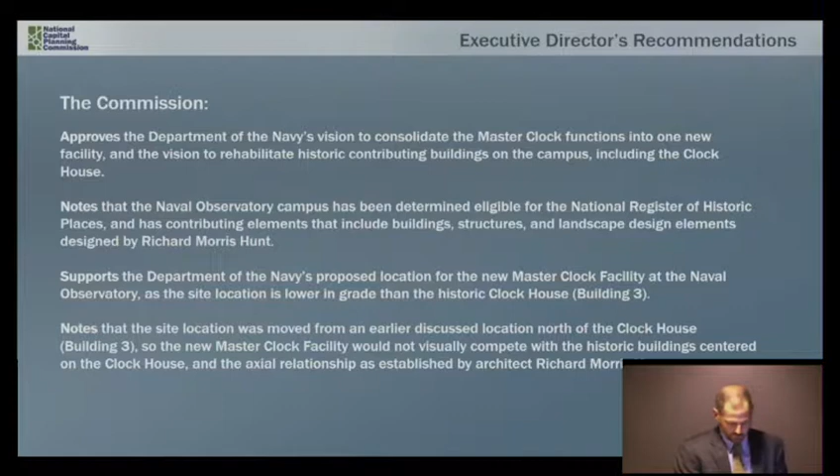And therefore, it's the Executive Director's recommendation that the Commission approve the Department of Navy's vision to consolidate the master clock facility into one facility, and the vision to rehabilitate historic contributing buildings on the campus, including the old clock house. Support the Department of Navy's proposed location for the new master clock facility. Support the design of the building and its minimalist contemporary architectural expression, and also request the Department of Navy provide additional views and perspectives from the north side of the clock house looking northeast, as well as from the ceremonial drive looking northwest. This concludes my presentation.

Available for questions, as well as representatives from the Department of the Navy. Thank you. Thank you, Mr. Fliss. I'd like to open this up for any comments, questions.

I thought it was very helpful doing the site visit earlier today and understanding what goes on there. It really is a fascinating facility. I appreciate the work that the staff and the Navy have done to design this and place it carefully, and I think that's the right strategy. I think generally the architectural strategy is right.

I do find the rendering of the building, and I don't know if it's literally how it's drawn or how it is finished, to be lacking. So I feel like we need to understand that better, and hopefully as we go through further reviews, that'll be refined and it'll look better than just a stack bond warehouse kind of thing. Part of it is just the drawing, but it'll look better.

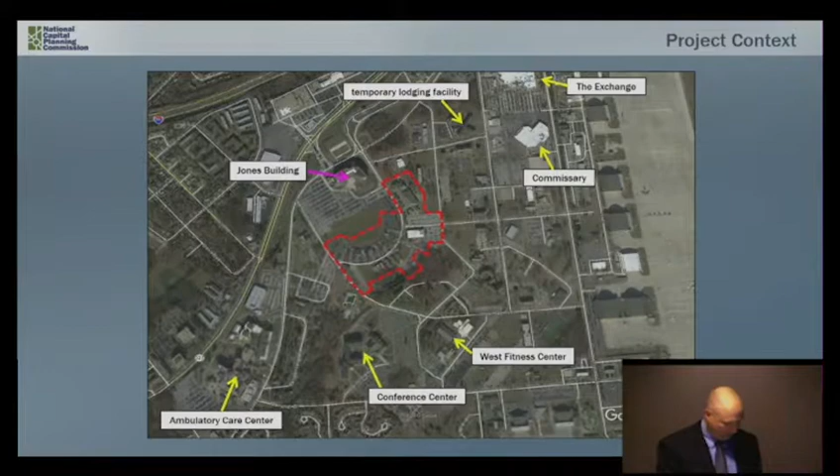The site is now home to a number of older vacant buildings previously used for light industrial and maintenance service functions. Also included in the project limits are two buildings, buildings 1539 and 1558, which currently house the functions that will be consolidated into the new Communications Center building. The project will be implemented in two phases. Phase 1 will demolish the existing on-site buildings and construct the new communications building and associated site improvements. Phase 2 will demolish buildings 1539 and 1558 and return these sites to open green space.

The new communications building is sited near the current operations to enable reuse of existing underground utilities, which would be prohibitively expensive to extend to other more distant locations on the installation.

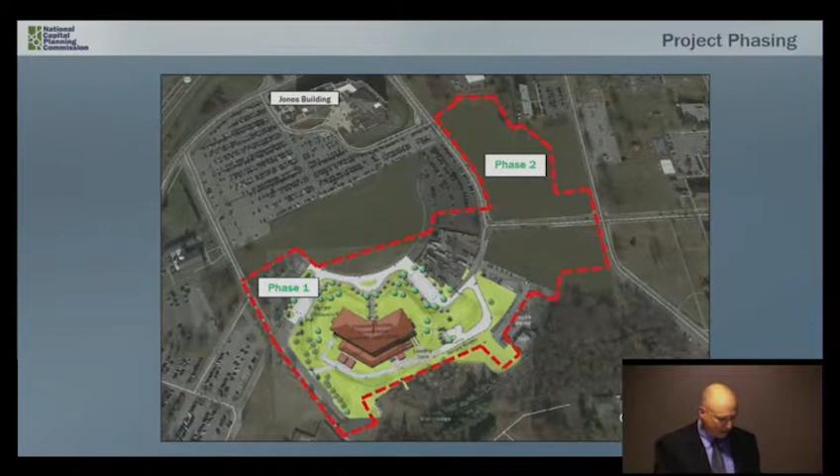Here's a close-up of the preliminary project site plan with 270 parking spaces, rear building mechanical areas, loading and emergency access, an arched driveway for drop-off traffic, and main entry walkway.

And here's the building's potential expansion area, which would allow extension of the building's east wing in the future.

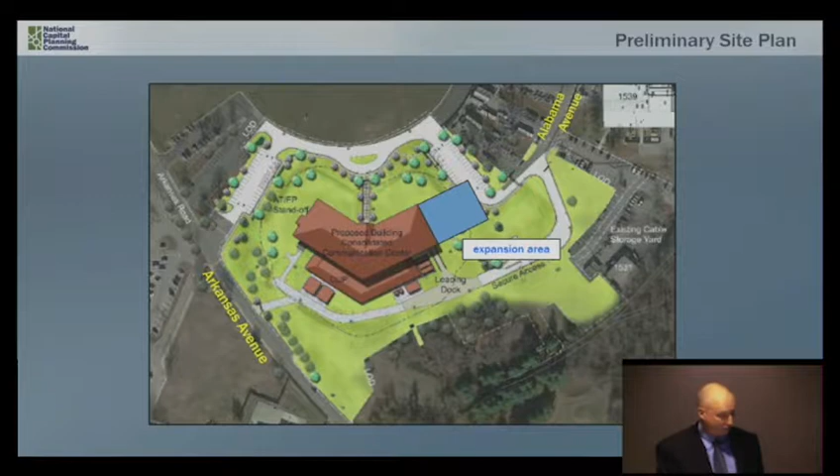The preliminary design maintains the required standoff buffer around the building pursuant to Department of Defense security standards, which is unchanged from the concept design. Here you can see the standoff buffer drawn around the current building footprint with its potential future expansion area, which would likely require eliminating the closest one or two radial parking areas to the east.

The new communications building will have 2 levels, similar to the concept submission, with a style based on current 2004 Joint Base Andrews architectural standards. The building is designed with a brick veneer, faux windows, accent bands, and a standing seam metal roof.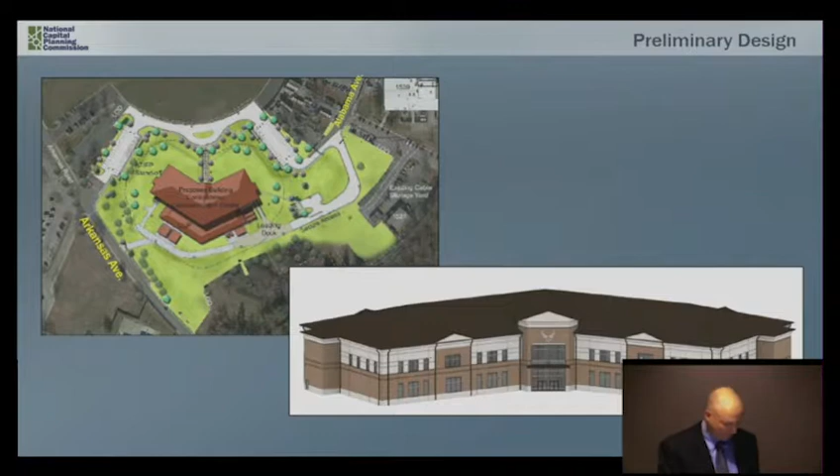In response to NCPC's previous comments, the submission specifies that the building will include shower locker room facilities, on-site bike racks, and reserved carpool van pool parking in nearby lots. Preliminary plans also show an arched drive in front of the building to accommodate drop-off traffic and potential future transit service.

In recognition of these changes, the Executive Director's recommendation will include a finding that the Navy has modified the site and building design in response to previous NCPC comments and to minimize project costs.

Furthermore, in light of the Navy's decision to reuse nearby existing paved areas for parking rather than constructing a new lot, the final recommendation will recognize the Navy for reusing these areas to minimize construction costs.

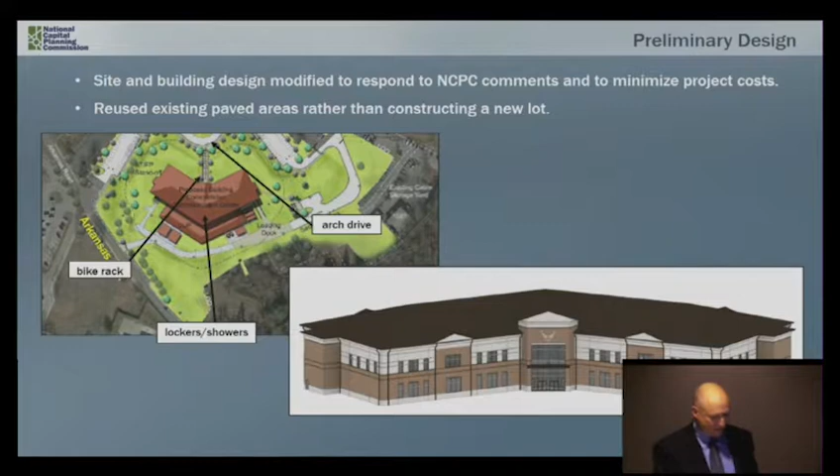One last point is, although the design of the project is consistent with current 2004 Joint Base Andrews design standards, we're requesting an update to the installation standards to reflect better and current design practices.

At the time of our previous Consolidated Communications Center review in November, we requested broader level information on future area circulation, street sections, parking, and vegetation in an effort to understand how the project would fit into installation plans for the area. In response, Joint Base Andrews submitted its current installation development plan to NCPC for review this past January.

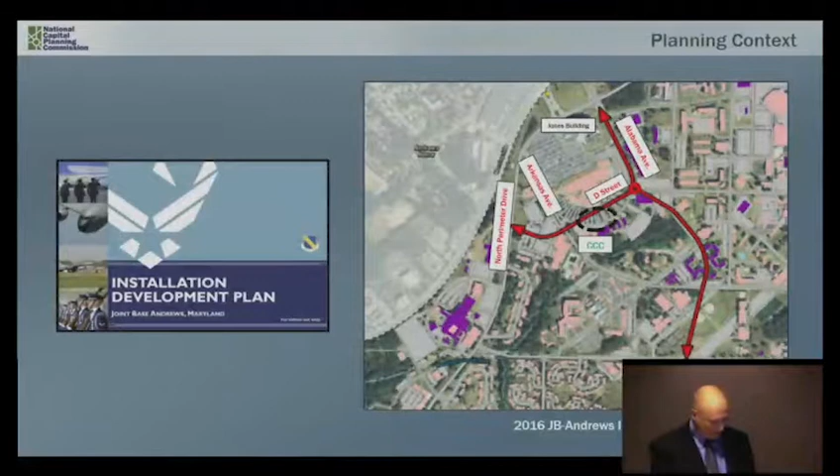Although, as a framework and recapitalization plan, we were not able to glean enough information on plans surrounding physical development other than a notional westward extension of D Street to connect with North Perimeter Road and Arkansas Avenue. To help us overcome this information gap, the installation submitted an internal concept plan for the Administration and Support District from 2010, with conceptual building footprints, a street network, parking, and area vegetation.

The installation development plan recommends a more detailed area development plan for the district, and the Air Force has requested funding for the plan in fiscal year 2019. You'll see a reference to their request in our final recommendation based on the importance of a more detailed area development plan for our ability to review future projects in the district.

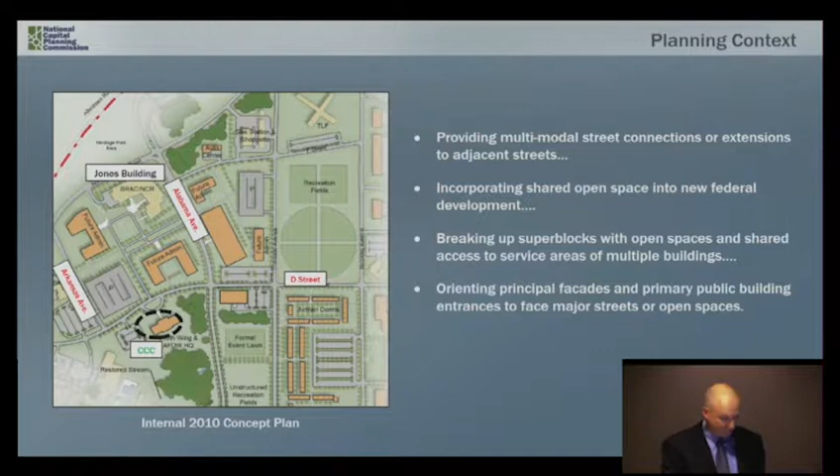The 2010 plan serves as the redevelopment vision for the area, reinforcing the district's function as a primary activity hub and backdrop to the Jones Building and other more prominent uses. We note the plan's consistency with several NCPC urban design policies, including providing extensions to adjacent streets, incorporating shared open space into new federal development, and breaking up superblocks with open spaces and shared access.

In the next few slides, I will display the internal concept plan on the left and a satellite image on the right with superimposed infrastructure to help provide a larger planning context for the project.

Here's the proposed new CCC building situated within the current Alabama Avenue alignment, just to the south of the Jones building lot. And here is the existing and potential future street network, depicted as solid and dotted lines respectively. In particular, I would like to highlight two key features of the area concept plan as they relate to the new communication building site.

The first is a street we refer to as Center Street, extending roughly to the northwest of the project site into the heart of the Administration and Support District. The second feature is the westward extension of D Street across the front north side of the new communication building, to provide a direct connection to Arkansas Avenue and North Perimeter Road.

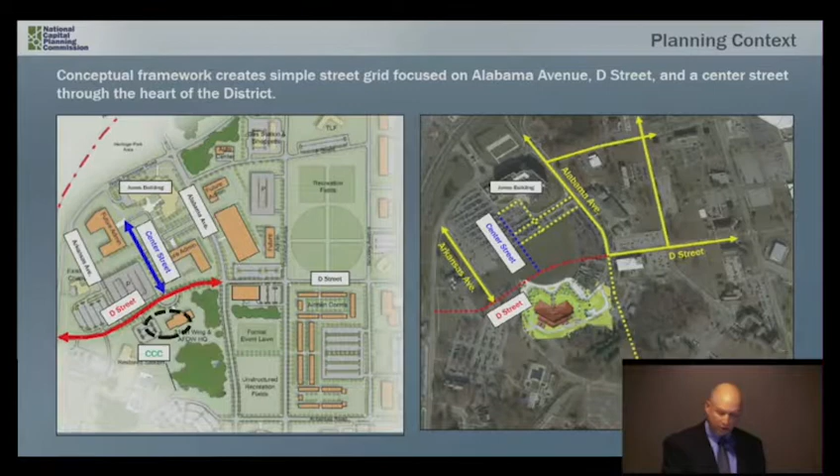In recognition of these two planned features, staff has expressed support in the final recommendation for Center Street and the D Street extension, which will help structure the district's future street grid network. In addition, the final recommendation includes a finding that the project's preliminary site plan does not preclude a D Street extension or Center Street alignment as depicted in the internal concept plan.

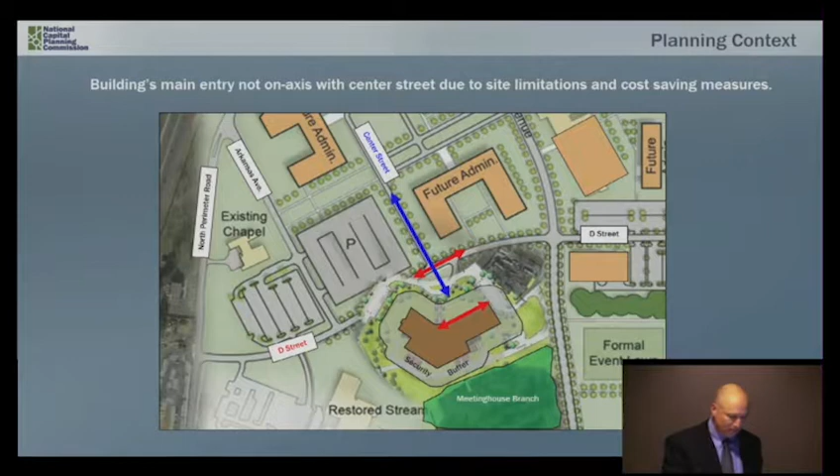Moving in a little closer, we can see Center Street's alignment skewed intersection with the arched driveway and front entrance at the building's point of inflection, which results from the project's need to work within existing developed areas as much as possible, in addition to a required setback buffer area and the Meetinghouse Branch stream area immediately to the south. We've noted these project constraints in our final recommendation with a finding that the building's main entry is not on axis with Center Street due to various site considerations.

With the design and construction of the new communication center prior to development of a more detailed area development plan for the district, it is challenging to comment on the project's relationship to other nearby planned future development. Nevertheless, staff has identified two basic relationships between the internal concept plan and new building that should be maintained.

First, the new building's east wing should orient roughly parallel to the D Street extension. Second, the location of the front arch driveway should be at the terminus of Center Street in support of good urban design planning principles.

Both of these relationships will help meld the new communications building into the planned future administrative and support district fabric and development. We've captured both of these points in the executive director's recommendation as summarized on this slide.

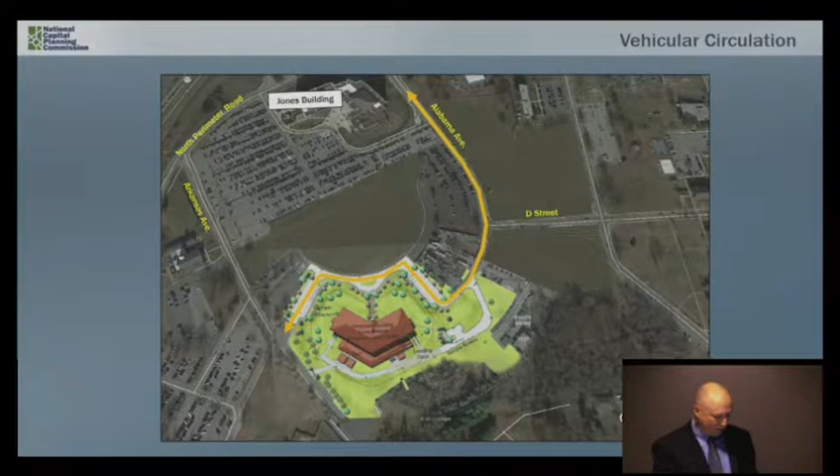Regarding the area's interim circulation, with traffic along Alabama Avenue diverting around the north side of the building through two parking areas, the Air Force assures us that this circulation scheme is manageable based on current traffic patterns, with virtually no through traffic traveling between the Alabama Avenue-D Street intersection and Arkansas Avenue. So we will be noting this as a finding in the final recommendation to the Commission.

A couple of final project submission requests in anticipation of the project's significant impervious surface reduction and required compliance with state and federal stormwater management standards. We're requesting a final stormwater management plan and supporting performance documentation. And in support of the preliminary submission's promise to mitigate tree removal based on a 1-to-1 replacement ratio, we're requesting a final landscape plan and other necessary documentation that demonstrates this in the next and final project submission.

So with that, here's the formal recommendation: to approve the preliminary site and building plans for the new Consolidated Communication Center; to find that the Navy has modified the design to respond to concept comments by the Commission and to minimize project costs; to commend the Navy for eliminating the new 300 space lot from the concept plan and utilizing existing nearby parking instead; to note that the Air Force has requested funding to complete an area development plan for the district.

In the meantime, the Air Force has submitted a concept plan for Commission use until an updated ADP is available, to support the planning district's conceptual framework, which creates a simple street grid around Alabama Avenue and D Street, in addition to a Center Street through the heart of the district.

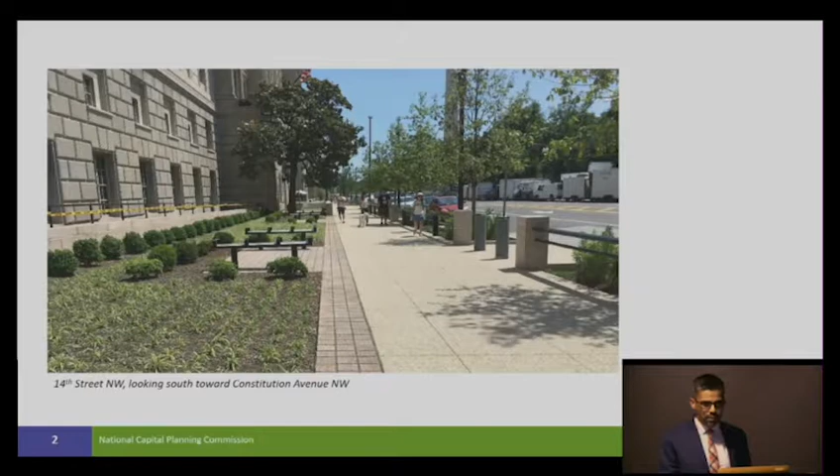If you recall, in May, Megan Spiegel and Catherine Roos briefed you on the Monumental Core Streetscape project, which they indicated would include wireless access points in the future. The presentation underscored the importance of the quality of DC streetscapes, which reinforces its unique role as the nation's capital and creates a welcoming and livable environment. Local and federal agencies are working together to address the impacts of this new cellular infrastructure across the city.

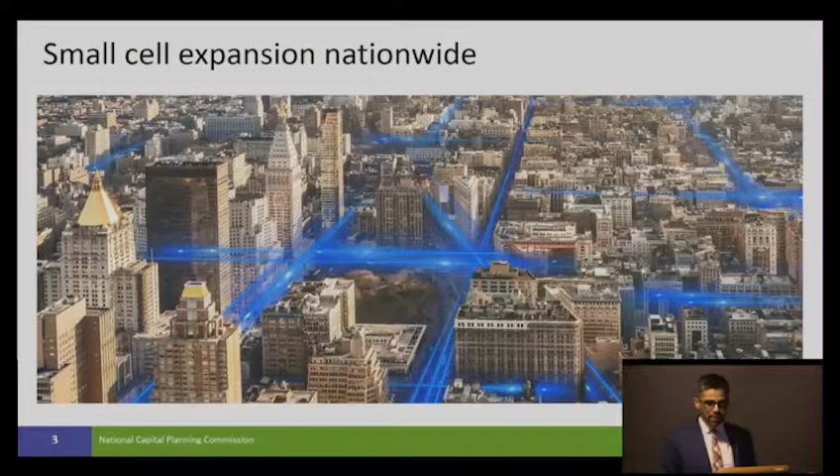We're seeing a surge of wireless infrastructure across the country. Cities and towns are working with cellular companies to prepare for the deployment of this new small cell infrastructure while minimizing impacts on their communities' public space. This presentation will discuss what the infrastructure is, examples of how it's being deployed, its impacts, and how it's being addressed in the district.

Small cell equipment will initially meet 4G voice and data demands, which we currently use. The providers are preparing to upgrade to 5G, which is the fifth generation of cellular technology. The underlying selling point of 5G is the Internet of Things, which is a seamless integration of multiple devices at much higher speeds on an unprecedented scale. Examples of small cell usage include times when we're paying for on-street parking, ordering delivery, or using GPS navigation systems.

Please note that this following graphic is one of many images that are sourced from a variety of cellular providers.

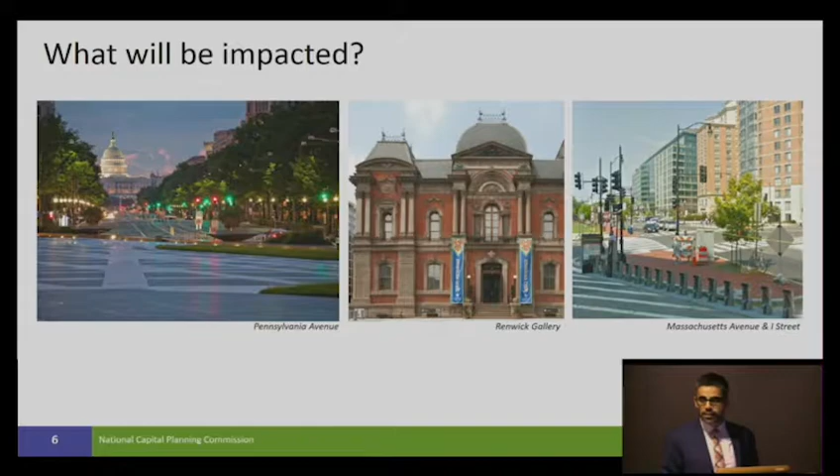This illustrates the type of standalone poles. The photo to the left is of a standalone pole that includes all of the equipment and antenna inside its cavity. This type of installation is called future-proof, since it has the potential to add equipment including the anticipated 5G technology. It is approximately 18 inches in diameter and requires a hand hole for access and maintenance.

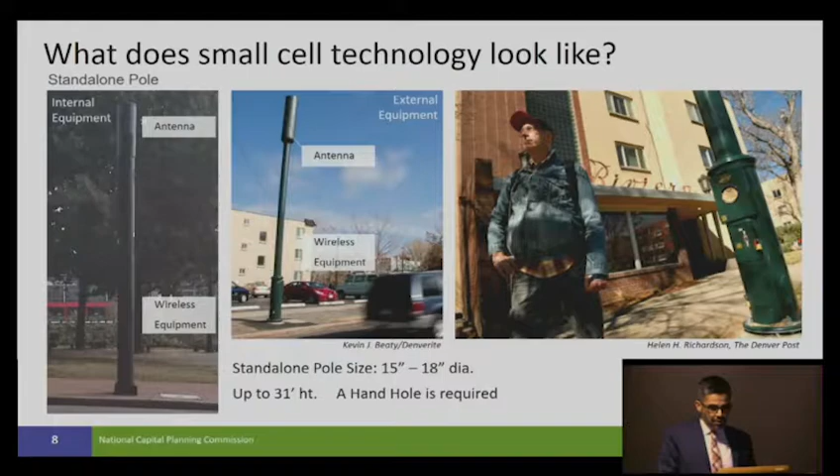This is the streamlined pole here. Anticipate the antenna above, equipment inside of the cavity, and the hand hole for maintenance at the surface. In the middle image is a standalone pole with the equipment and antenna sitting outside of the cavity. Future technology upgrades will require attachments to the outside of the pole. The image to the right illustrates the scale of a standalone pole and its equipment for access and maintenance.

What are we doing about it? DDOT is facilitating a collaborative interagency team to address the local and federal issues mentioned previously. The team members include DDOT, DCOP, SHPO, NCPC, CFA, and NPS has recently joined. DDOT entered into a master license agreement with several cellular providers. Each provider will be installing their own equipment throughout the district. However, some companies are hoteling and installing infrastructure which houses up to 4 cellular providers.

DDOT will be administering the permit process. Providers will be issued permits on a first-come, first-served basis. DDOT is currently meeting regularly with 3 cellular providers regarding their proposals. Additional providers may be entering into master licensing agreements in the future. Meanwhile, the interagency team is currently drafting design guidelines to address our shared interests.

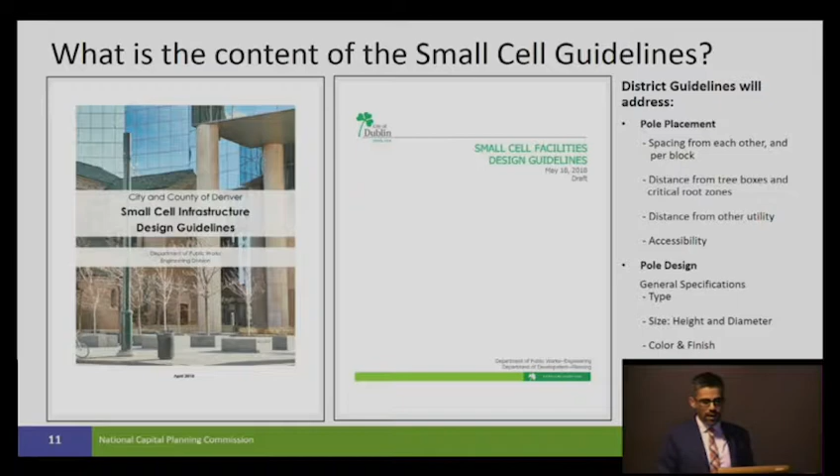The team anticipates completing the guidelines for a public meeting before the DC Public Space Committee at the end of September. The team will also be presenting this information presentation to CFA next week. Staff would like to thank the district for the opportunity to collaborate on this effort. The district has been really great in facilitating and coordinating with our agencies. This concludes my presentation. We welcome any comments that you may have today.

And Catherine and I are available to answer questions. Thank you very much. Are there any questions or comments about this topic? Yes, Mr. Chairman. What other cities have started this process? Oh, what other cities? Right.

What other cities have started the process? Denver, Berkeley, San Francisco, San Diego, Winter Haven, Florida, a lot of them.

Are they pretty far along in terms of the process? Some of them are, some are in the process of receiving approval or reaching approval with their guidelines. Some have achieved approval, and we've been looking at their guidelines as precedents.

Is the requirement or ability to house all carriers or multiple carriers in one installation regulated by the government, or is that based on relationships between the carriers? I'll defer that to DDOT. We have one signed MLA right now where the company has already indicated they will be what's called a hoteler, housing numerous different cellular companies' equipment. But there is no requirement for any particular company to hotel their facilities - it's a company's decision whether they want their own separate facilities.